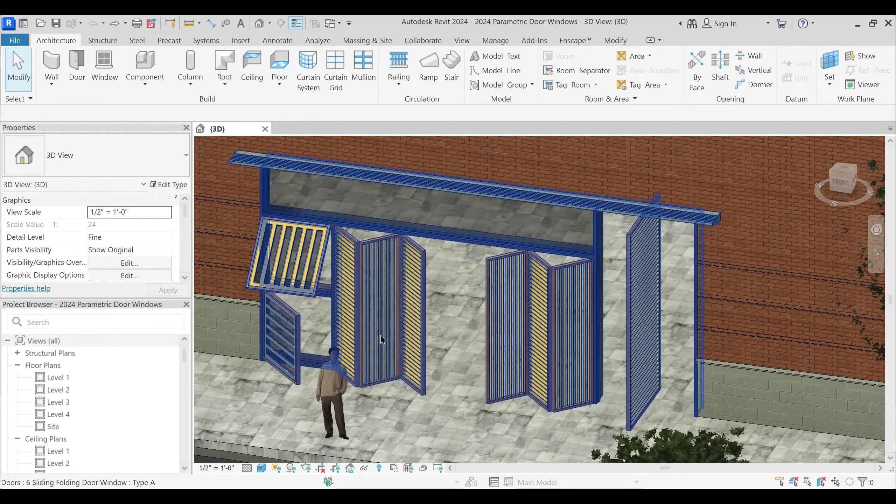So let me just acquaint you to this particular parametric family, wherein if I just select this particular family and if I just change this to type B, this is going to take a bit of time to regenerate.

Just stay tuned. But what you will notice is that with this change in type, the entire configuration of that particular family changes, wherein you see that this sliding folding door shutter, the number of sliding folding door shutters decreases and the size also increases.

This is because if I just go to edit type, then you see that it has all these parameters associated to it. The change in a few numbers of which will give you a different result. So you guys just stay tuned and I will just change a few numbers and parameters and you will see that it gives a different result.

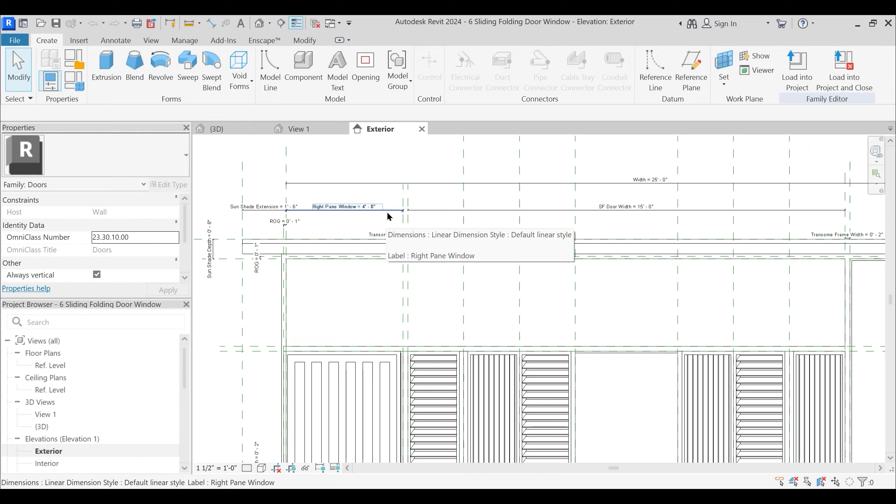If I just go to edit type, then you see that all these parameters has been assigned to this particular family, and all these parameters has this particular parametric computational formulas associated to it. And this is the reason that the change in numbers of this particular family in the project environment respond to that particular change.

Okay, and you see that this is a different family which is reading horizontal louver module center rotation. This is again the vertical louver module align rotation. This is again horizontal louver align rotation. This is the casement window, and this is the awning window.

All these particular parametric families has been designed by me way back in 2016, and ever since till date I'm using this particular parametric formulas, parametric families, doors and windows parametric families, from project to project with few alterations and few changes in dimensions.

And once modeled, I can use it across several different files with the changes. For example, if you see that this is just one single 4 door 2D 3D double adjustable swing with horizontal louvers, has 3 different types, wherein this is type A, which is aligned rotation, this is the center pivot, and this is the off center pivot.

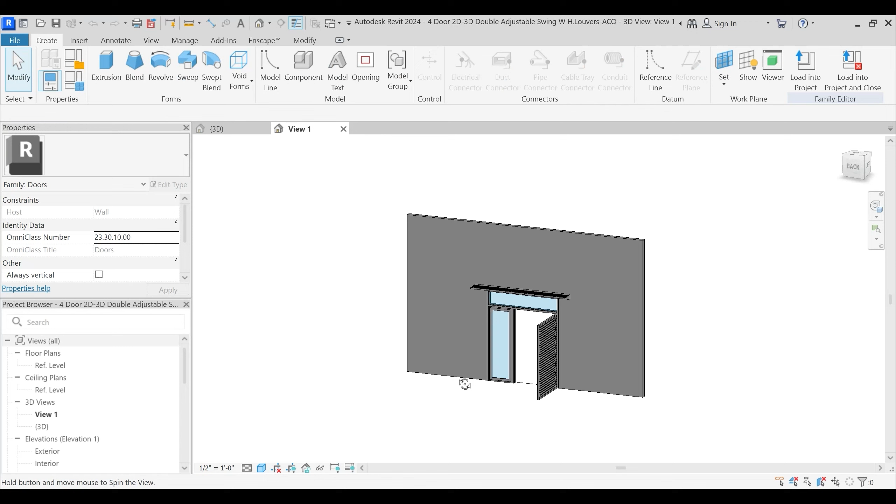But all these doors are one and the same, but it has some or the other customization. And of this one family, that is the center pivot door family, has been used by me in this particular configuration. This is because if I just go to this particular family, if I just go to edit family, then again this is the door template file wherein this particular family has been designed, and several different types has been designed by assigning and constraining it with several parameters, and several different parametric families has been nested and embedded.

Wherein you see that this is that particular center pivot door family, wherein you see that this is the different family. When if you just go to edit type, edit family, then it will take you to that particular family file where that door panel has been designed.

This is again nested with a different family. See, horizontal louver panel line based family. So you see that lot of families, one family within the another family. So this is that line based family, which again has this one nested family, that is horizontal louver single blade.

And you see that only one family, when referenced and nested into another family, you can use from project to project. So all this has been made and which has been used by me from project to project with few alterations and few customization.

So in today's exercise, I'm just going to show you how you can create this particular configuration wherein you can have such sliding folding door panel shutters, and also this window panel shutters, casement and awning. I'm going to show you that particular thing from scratch. So watch the entire video till the end. It is going to be very interesting and very informative session.

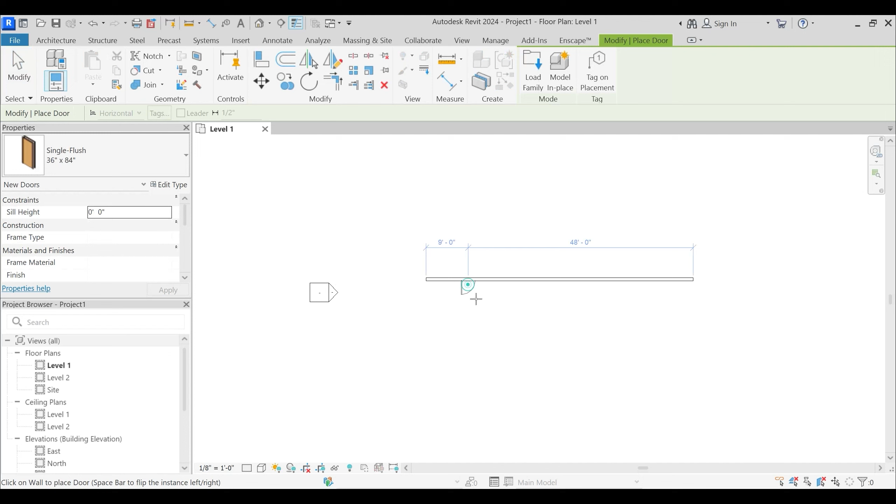So what we are going to do is make that particular customization in a door template file. So essentially, to understand that, first I need to host a door, and you see that this is that particular door which I'm just going to edit. It will open up this particular door template file where we are going to design that configuration.

So if I go to this ground floor, you see that this is the door template file where that particular door has been designed. What I'm going to do is not use this file, but use that door template file where this door has been designed. You see it has this 3D component and 2D annotation lines which are not visible in the project environment in 3D, and this frame elements, but I'm not happy with this particular thing.

So what we are going to do is just open up this template file. File, new, and family, and you essentially need to have your library extracted properly. From here, I will just open up this door template file and open. So this is that template file where we are going to design that particular thing.

And I'm not happy with this frame that comes with Revit, so I'm just going to delete it. Herein, what I'm going to do is go to elevation. It has these inbuilt parameters, width, height and thickness, the three inbuilt project parameters associated to it, wherein I'm just going to stretch this and expand it a bit so we can have a larger configuration. I'm also going to delete these lines which show the indication that there is a door swing here.

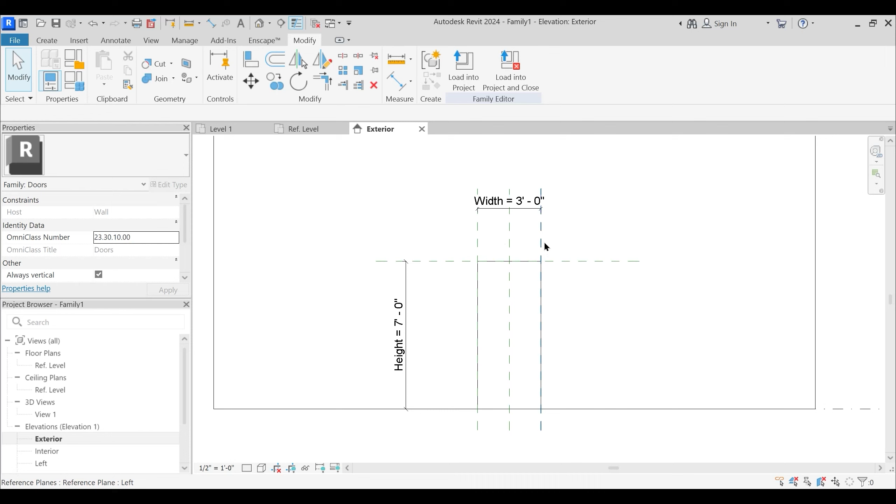So this is the center reference plane, center left, right. Now what I'm going to do is first edit this width and change it to something drastic like 15 feet, and height to something like 18 feet. Fine, 18 feet is too huge, I get that 12 feet is enough. Okay, I just drag this parameter a bit far away.

Now what I'm going to do is edit this window frame, this opening cut. But before that, I'm just going to assign a few reference planes, RP, RP is the shortcut for reference plane. And let me just... yeah, RP and I'm just going to assign that from original reference planes.

From original this, but I cannot see the reference plane. Let me just drag this a bit. What I'm going to do is just make this opening cut 1 inch larger. So just press tab until you reach this point, until you read opening cut, and just edit the sketch.

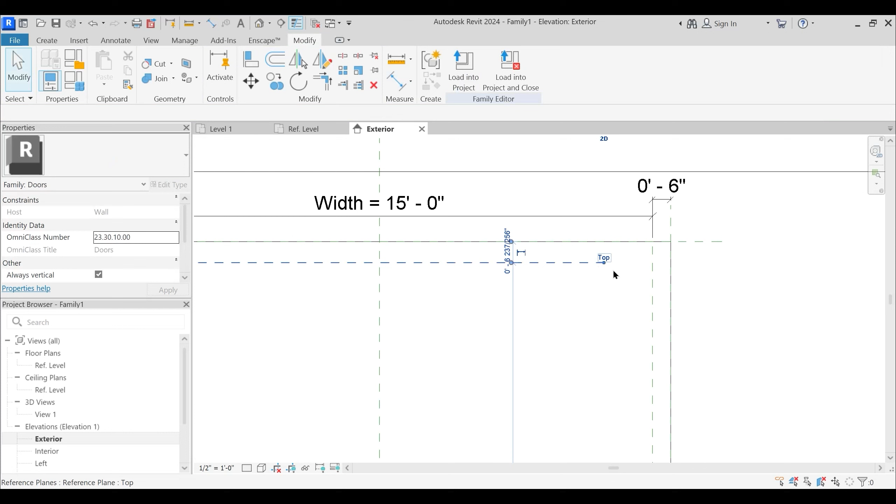So you are editing the original sketch of that opening cut that comes with Revit. So I'm just going to drag it, remove constraint and lock it, remove constraint and lock it again, and remove constraint and lock it again. And with that I'm just going to finish, and herein I'm just going to assign parameters to this newly created reference plane. And from here, no, here it is not needed, only, yeah, this one, align, and yes.

Okay, and I'm just going to select all of this and assign a parameter, and I'm going to use a shared parameters text file for this. I've already created one, but what you need to do is when this dialog box pops up, just browse to a location where you want to save that particular file and say create new. I'll just save this to desktop, I will call it universal parameters. The reason of creating this shared parameter text file is that we are going to use a lot of parameters which will be common for this particular doors and windows family, which you can use again and again.

So edit, and browse, yes, universal text parameters, and from that I'm just going to create new, and I'm just going to call this door windows. Fine, and new, and first is rough opening gap, ROG for short. Fine, that parameter has been loaded, and just going to click OK. From the type properties dialog box, I'm just going to change that rough opening gap to 1 inch.

Okay, and apply. The reason I'll just explain, right now you won't understand, but the reason of doing this thing I'll explain you. So first is what we are going to do to this particular opening cut: for that particular door, what we need is to design a wooden frame, a wooden frame which we can snap to this particular opening cut.

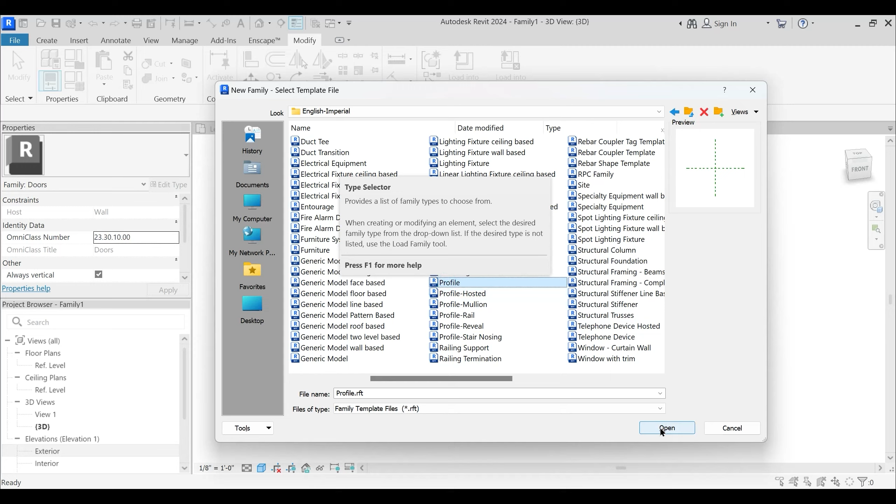Fine, so this is the profile, and first what I'm going to do is use the line command to create something which looks like a typical door window frame. I'll explain the reason for creating that.

So you have one, two, three vertical segments. What I'll do is create reference planes: one, two, three, four, and one, two, three, four, five. So that's five horizontal and four vertical segments.

Now I'm going to create this particular profile across these reference planes, using the line command: one, two, three, four, five, six. With this created, I don't need this reference anymore, so I'll delete it.

Now I'm going to use the line command and lock all these particular lines to the reference planes. And lock this last one, and this also lock.

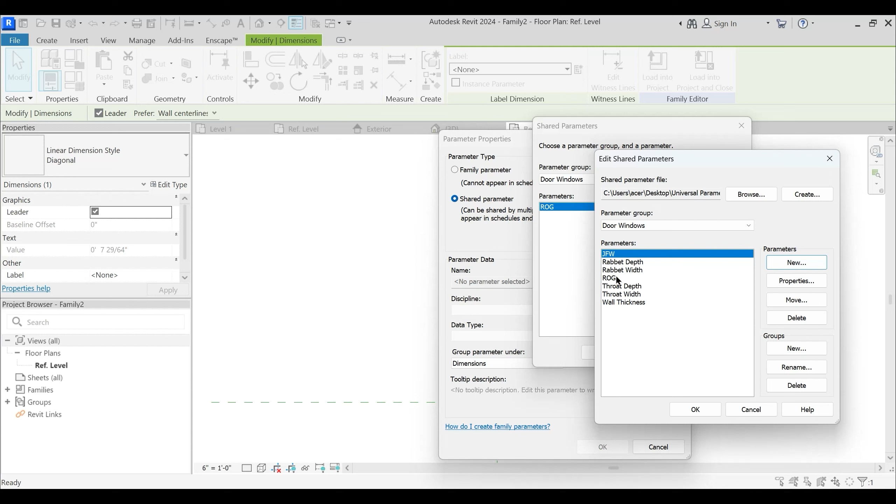And we have jamb frame width, JFW for short. What else? Throat width, throat depth, wall thickness, and most importantly, a thickness parameter - let's say door panel thickness. Door or window, so let's keep it generic - just thickness parameter.

Fine, I'm going to load all these parameters. First I'm going to select what I selected earlier. Just click OK - oh, this should equal wall thickness. And both of these should equal throat depth.

And this should be throat width. This is the jamb frame width. And this is the rabbet width. And this is the rabbet depth. And this is going to be just the thickness.

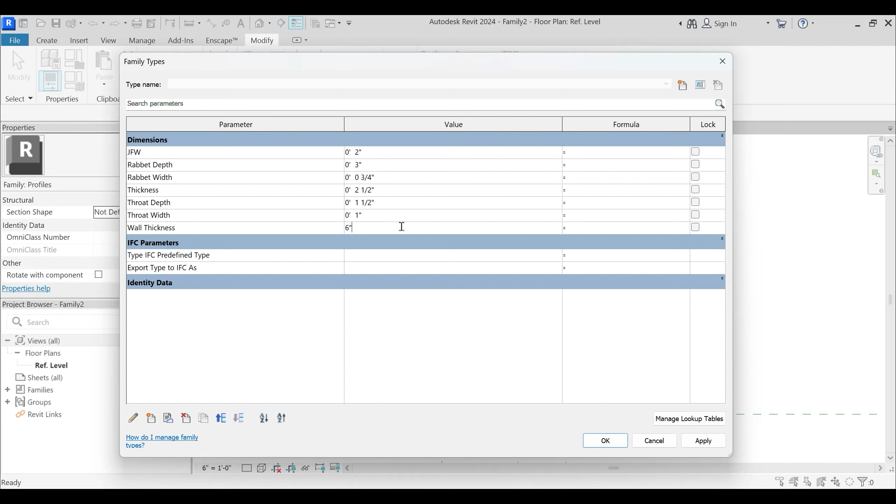And with all these changes, if I just click apply, you see that this particular thing changes. Uh-oh. Oh, why is this creating a problem? Yeah, fine, okay.

I guess there's some problem here - jamb frame width is 2 inches and throat width is... okay, throat depth is the problem. So throat depth should only be 0.5 inches and not 1.5. How did I... yes, fine. So now this perfectly looks like a typical door frame.

Now I'm going to load this profile into the door template file. So this profile from family 2 should go to family 1. Since it's a profile, you cannot model it, you can only host it. So I'll go to family profiles, and I have family 2 - I'll rename it to be specific, calling it wooden frame.

Copy and rename this and paste it. Now what I'm going to do is close family 1 - not family 1, this family 2 - since I've loaded it into that particular door template file, I don't need it anymore.

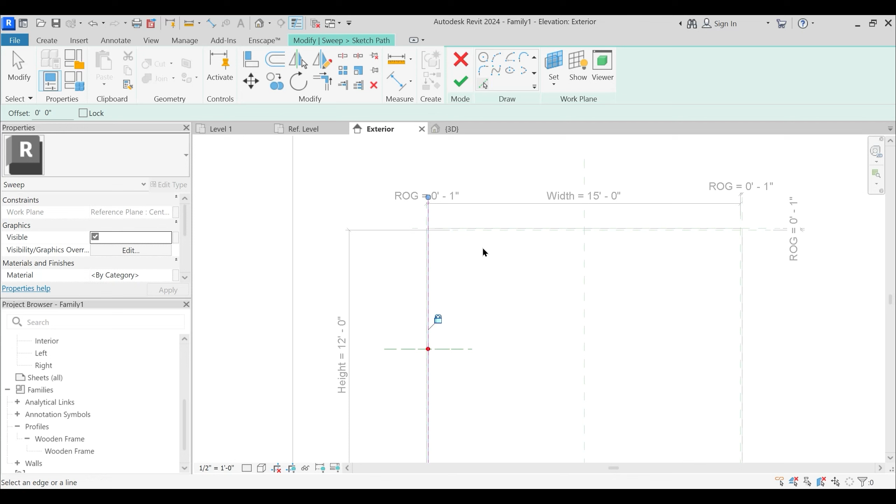I'm going to snap to the original reference plane of the original door cut. I'm just going to lock it to this, and align and snap.

Let me just join this to this. Align and just snap this point and lock. Align and snap this point and lock.

With that, I'm going to finish, select profile, load that wooden profile, and finish. So that wooden frame is now hosted to that particular opening cut, but it will not be properly hosted.

Since it is a profile, it has this instance parameter which you can edit, wherein I'm going to change this angle to 180, and this horizontal offset and vertical offset.

So let's check what horizontal offset corresponds to. 2 inch. Yeah, fine, this is that particular fine. So this is the reason in that particular template file of giving this particular face the dimension jamb frame width.

Jam frame width refers to the door condition, the frame condition in jamb, the position of this door frame in jamb condition. That's why we call it jamb frame width, and I have given it 2 inch because I know that in this project environment I'm going to make this particular opening cut 1 inch larger.

So with this 2 inch, I would exactly flush it and create that particular frame just like it is hugging a wall.

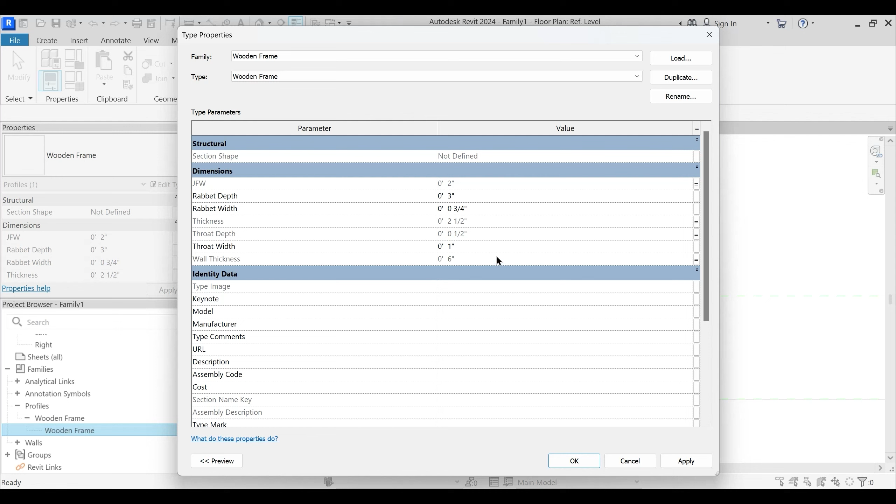So this is how we pass on the parameters of this newly created embedded file to this template file, or the host file, to the family which you embed into another family. You have to pass on the parameters, and you see now that it has all those parameters, jamb frame width and throat depth and everything.

So with this I'm going to select this particular profile and go to this jamb frame horizontal offset, and make it equal to jamb frame width.

Whatever is the condition in the project environment, if you constrain it—if I had just given it a variable here and not constrained it with a parameter, you'd never know what the wall thickness or condition will be in the project environment. So in order to constrain it with a parameter, whatever the situation in the project environment, it will always stay in place.

Now what we need to do is its vertical alignment. If you measure this, it's 3.5, but you never know what the wall thickness will be. Right now it is 6 inches, so in that case this offset is 3.5.

But what if the thickness of the wall is 8 inches or 9 inches in the project environment, and you want this particular frame to expand accordingly? In order to make this happen, I'm going to use some computation, wherein I'm going to assign this a parameter and call it equal to wall thickness—yes, wall thickness, the parameter which has been passed on from that profile family also.

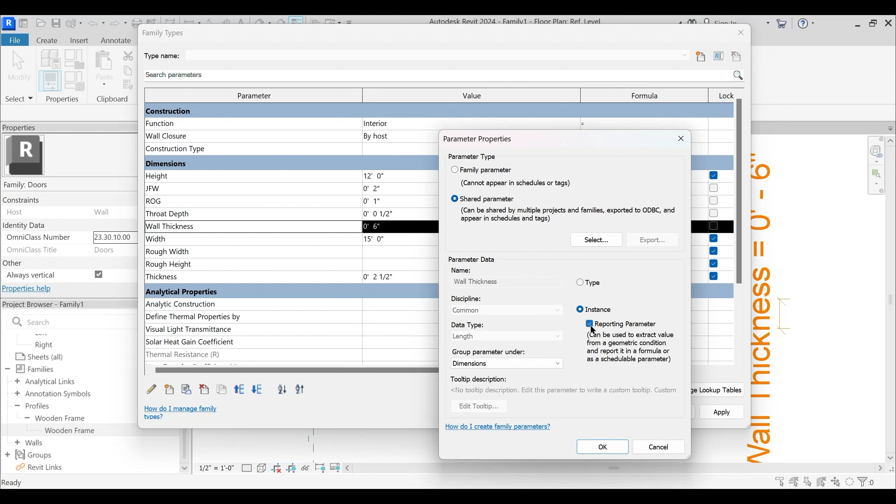Okay, what I'm going to do is make this wall thickness edit an instance and reporting parameter, because I want to report it to whatever are the variables in the project environment. So with that, it is now a reporting parameter.

Now for the vertical offset, I'm going to define one more parameter called frame vertical offset. I want to make it an instance parameter because it's going to be used on another instance, driven by the reporting parameter wall thickness as a formula. I want this parameter to be driven by another instance parameter, which is why frame vertical offset needs to be instance.

Also, I'm going to use this throat depth. This is the throat depth — if you remember from the profiles section we designed. Let me go to this wooden profile and edit it, and you see this is the throat depth. This has a relation with the wall thickness, so that also needs to be instance.

So frame vertical offset should be instance, and throat depth should also be instance. What I'm going to do is define what the frame vertical offset should be: it should equal whatever the wall thickness is in the project environment.

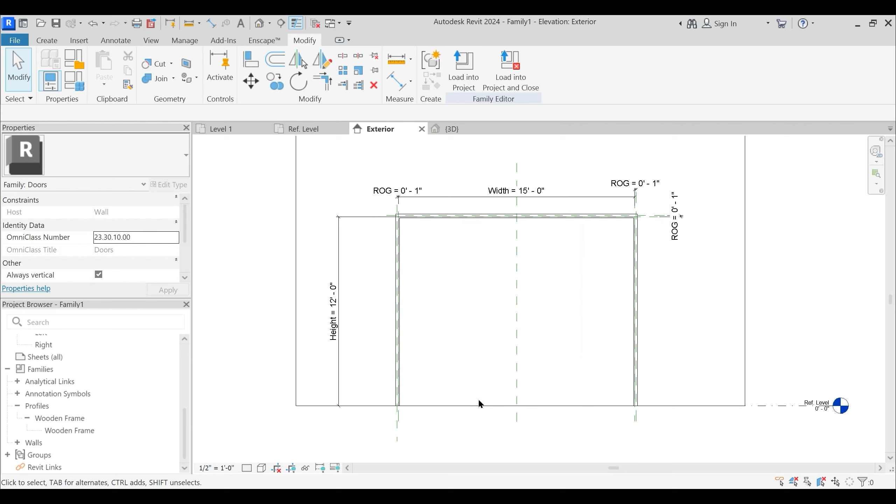Now we need to create the configuration, wherein this family is going to have a lot of other embedded and nested families within. So I'm just going to draw a couple of reference planes.

One to two, one and two, one and two, and also one over here. One. All of that, I'm just going to strike a parameter, and yes, one more over here too. Okay, what I'm going to do is select all of these parameters and make them equal to...

...a new parameter called transom frame width. Okay, and with that I'll have that changed.

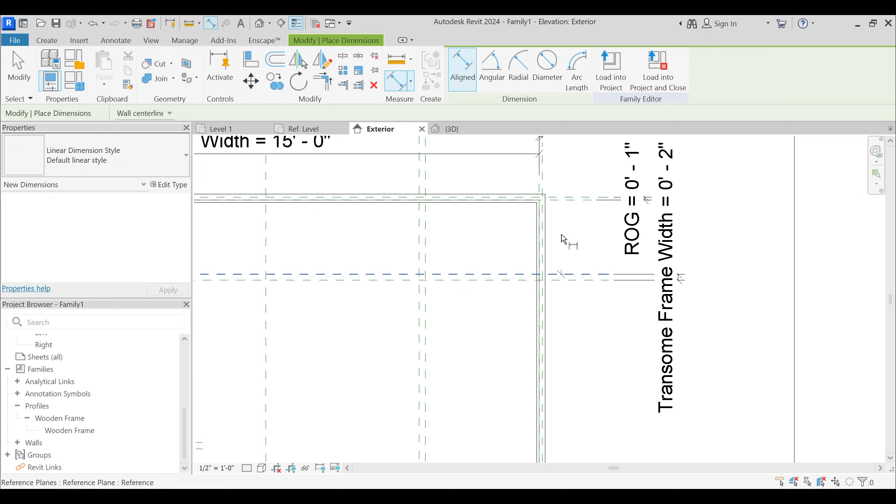What I'll do is change the transom frame width to 2 inches. Now I'm going to define one more parameter over here. There are going to be a lot of parameters, so...

3 inch — yeah, 3 inch, this is better. And this should equal a new parameter, transom height. Finish.

The file already contains transom height — yes, I selected the wrong parameter. I will just make this transom height 18 inches for now. You cannot change it from here, you have to change it from here. Where is transom height? Yes, change it to 19 inches.

Apply, yeah, fine — just see that it parametrically expands. Now we have to snap that wooden door frame profile to this configuration to achieve this result. You see there's a frame across this entire configuration, horizontal and vertical wooden frame. Let me quickly do that.

With that work plane selected, set work plane — center front back. What I'm going to do is create a sweep, sketch path, and for a couple of minutes I'm just going to follow the same process to create this particular profile. Just stay tuned. Align and lock, align and lock, and sketch path finish, select profile and wooden frame, and finish.

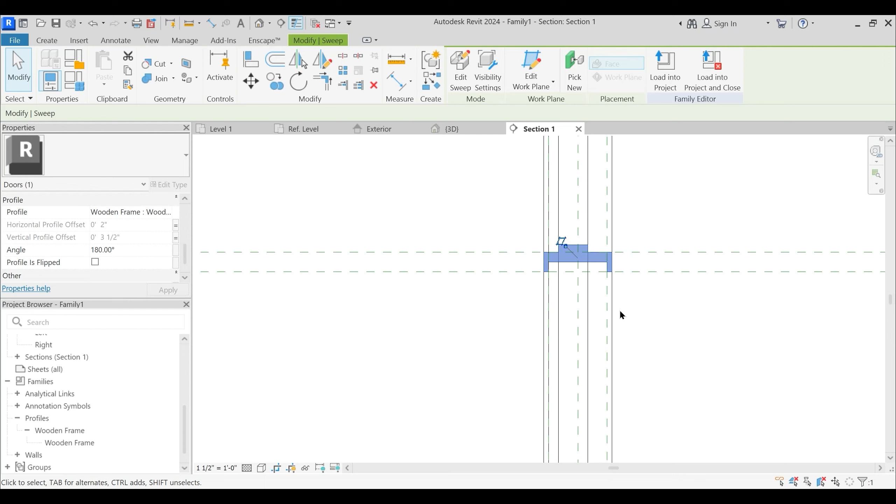So now for guessing games, what we need to do is set this to 180. Horizontal profile equals jamb frame width, and vertical profile equals frame vertical offset. Once designed, you can use those parameters again and again, and now this is perfectly corresponding to that vertical segment.

Only thing I forgot for this is the material part. Material, shared, select, edit, new, and wooden frame material. That is the material parameter, so wooden frame material, and data type should be material.

I hope the recording is on. Yeah, fine. So okay, and likewise just change this material also to this wooden frame material.

Now let's go to exterior and just hide this. Now I'll be pretty much quick and fast, so just stay tuned. Sketch path, pick lines, lock, align, dot and lock, dot and lock, and finish. Select profile, wooden profile, and finish.

Section and guessing games again. Frame wooden material and 180, and profile is flipped, and vertical frame vertical offset, and horizontal should be equal to jamb frame width.

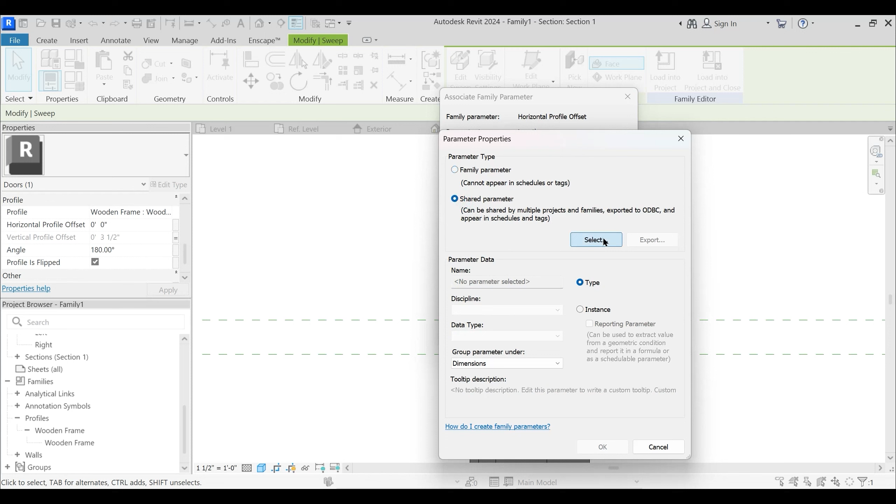Okay, now in order to make this in place, we have to create one more parameter, and that would be shared parameters. Select, edit, new, and negative jamb frame width. Just use that negative jamb frame width. Go to family types, and for negative jamb frame width just type formula minus jamb frame width. That will become -2, and yeah, that is now perfectly flushed.

See, what you need to just do is join this to this, join this to this. Let me just create other parts and pieces of this.

I guess that this should have stopped here. So edit sweep and sketch path. Remove constraint and lock it. Yes, finish. And likewise for this also.

Unjoin. Yes. And go to that exterior. Why is it not visible? Yeah, it was hidden. Edit sweep and sketch path.

Certain things you won't understand right now, but once that thing is achieved and the modeling part is done, then you will understand, and finish.

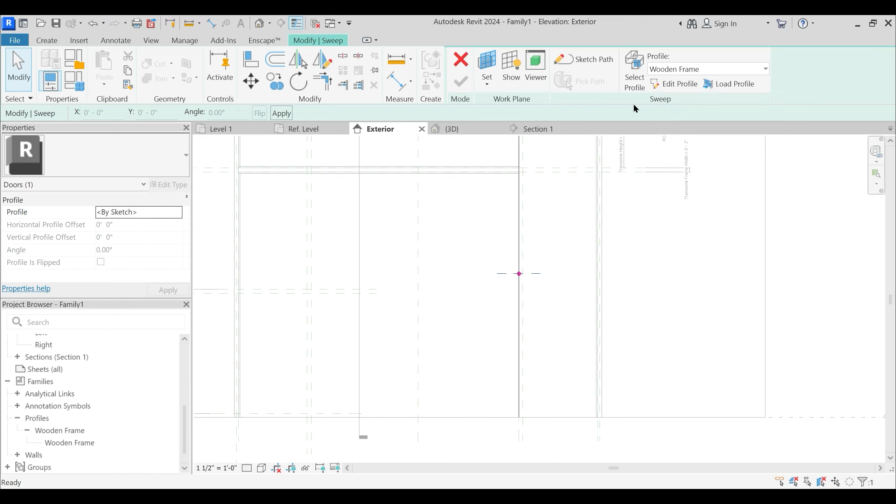Let me just create another sketch path, pick lines, and this side, align and lock, and lock, and wooden frame, and just finish.

Now let's see it in plan, and yeah. So now we need to properly assign this in place. Vertical frame vertical offset. Yes, this is done. So this corresponds to the configuration of that building profile.

Fine, so this again, I click the wrong button. Okay, wooden frame material and guessing games 180. Profile is flipped, frame vertical offset, and yeah, it's done. And join 1 to 3D, and yeah.

Okay, so now you have this. The reason for stopping here was that we were going to have this frame here. So join this and join this. Join this to this. Yeah, everything is joined.

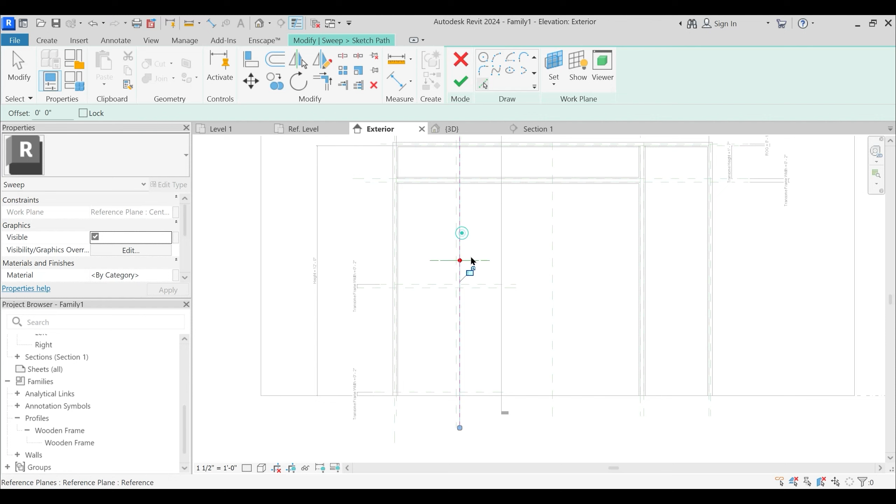Fine, let me go to exterior, and now let me just quickly design this part. So create sweeps, sketch path, pick path, and align, dot and lock, and finish. Select profile, wooden profile, finish.

Create one more sweep, sketch path, pick lines, inside, lock, align, bottom reference plane, dot and lock, this, dot and lock, modify and finish, select profile and wooden profile and finish.

Okay, now let's go to plan again and properly position that in place, which is right now not positioned properly. So let me just select this and drag it and pin, and drag it a bit and then pin it again.

Yes, select this, and again material to be equals the wooden frame material, and guessing games 180. Frame vertical offsets, and once created you can use it again and again. This material to be wooden frame material, and 180, but the profile is flipped, I guess. Yes, and I'm right. And vertical frame offset is going to frame vertical offset.

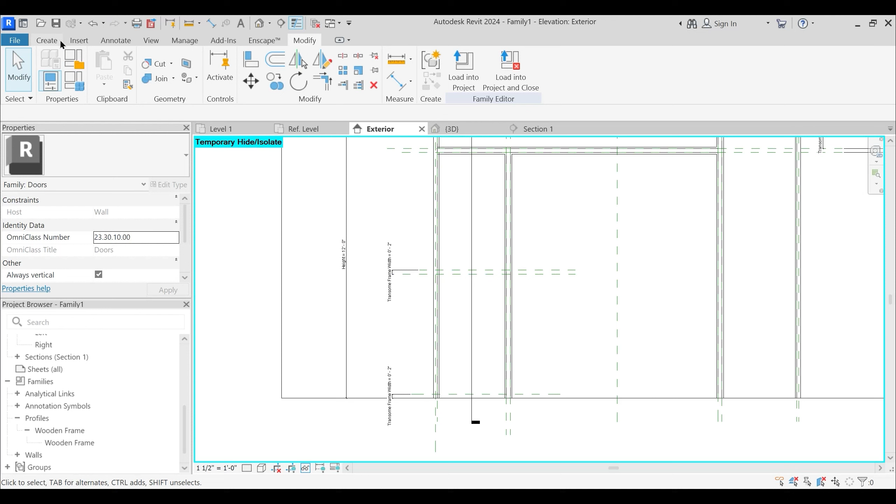Okay, and create and quickly sweep, sketch path, and pick lines, lock, align, lock, and constraining reference planes to reference lines, wooden frame and finish, and let me do both of this also.

Then once and for all, we will position all of them together in one place. Pick lines, lock, align, dot and lock, finish, wooden profile and finish.

Create, sweep, sketch path, lock, align, and finish, wooden profile and finish.

Yes, and now go to that particular section where you have to position all this perfectly in place, and for that I will be pretty much fast. 180 and vertical frame offset, and horizontal is to be jamb frame width. Yes, so that's now perfect.

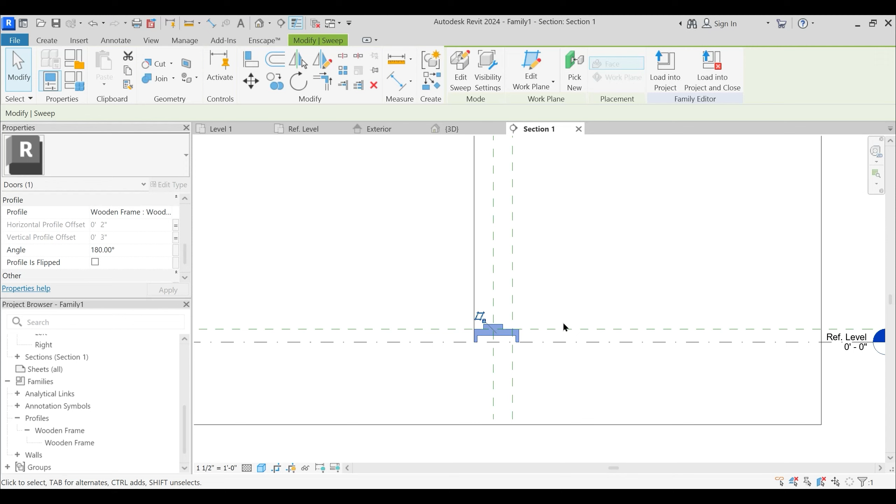And with this, now this also wooden frame and 180, vertical frame offset will go to frame vertical offset, and yeah, that is positioned properly.

This to be wooden frame material and 180, and profile is flipped, and frame vertical offset. Fine, and join all of that 1 to 2.

Okay, and then let's go to 3D. And you have beautifully created that particular entire configuration. Okay, what you just need to do is just cross check whether something is left to join. Yes, now everything is joined.

So let me just, from here to here, call it a parameter and share parameter, select, edit. And now I'm just going to create a couple of parameters which we are going to use during the modeling process. So just stay tuned.

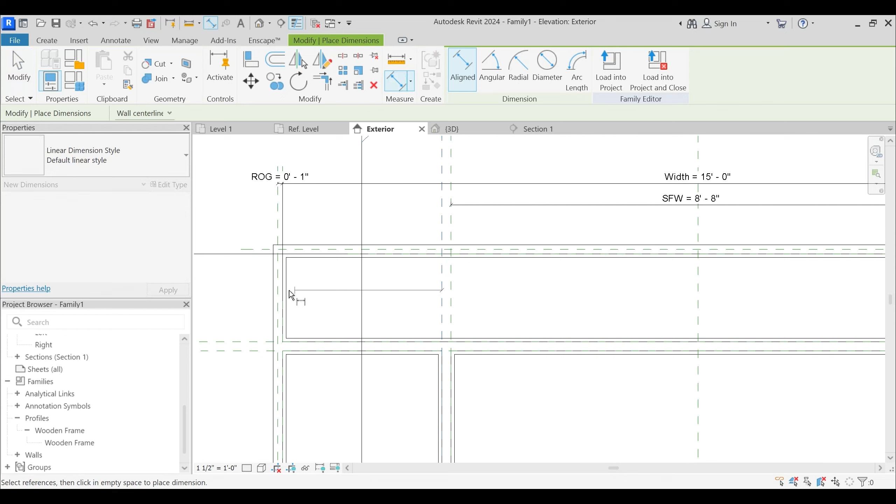So this is going to be sliding folding width, 8 foot 8 inches, and this is going to be right pane window, right pane dash window width.

Okay, right pane, not panel, so just delete it. New, and right pane window width, because we are going to reference awning and casement window, so that's why.

New left pane door, let's call it pivot door, okay, pivot door width. Fine. So okay, and what we are going to select this for the right pane, right pane window width.

Okay, fine. So now all this, what you see, has been assigned the parameters and constrained. But for this last one, we cannot assign a parameter, otherwise it will pop up an error that you're over constraining a sketch. So you have to use a parametric computation formula to assign this.

Even if you just go and try to assign this a parameter, and let's just call it any random parameter, then you see that it will say reference planes are over constrained. So what we have to do is use this particular width in order to assign the geometries that we design. In order to assign parameters to this part, we have to use the computational formulas.

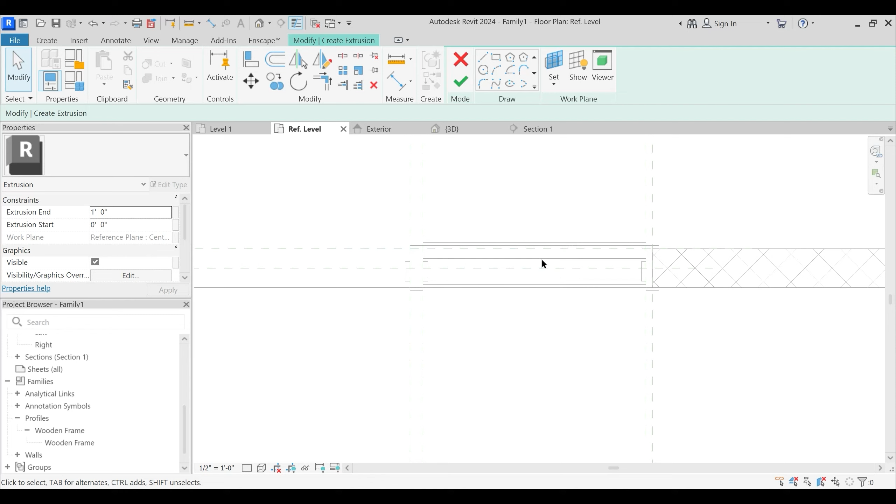Okay, fine. So for that, I'm just going to create one extrusion and set plane, and while going to reference level, we are going to host a glass onto this surface. Which surface are we going to use? Yeah, this surface.

So I'm going to set and pick a plane and use this particular surface, and then go to exterior, and herein I'm just going to design one simple extrusion which I'm going to lock. Okay, lock all of this. And I'm just going to call this extrusion, and it is equal to...

Shared parameters, and that would be one more parameter, that would be glass thickness. Okay, and glass thickness, okay. Yes, okay. And this is going to equal glass material, which is the inbuilt material of Revit, so you don't need to design that material, you can just reference it.

And this extrusion end should equal glass thickness, which, while going to this type properties dialog box, I will select that glass thickness and change it to half inch, that is 12 mm, standard conventional door glass thickness, and just finish. Let's go to 3D, and yeah, see, your glass has been modeled perfectly in place, but I guess...

I guess that it has been snapped.

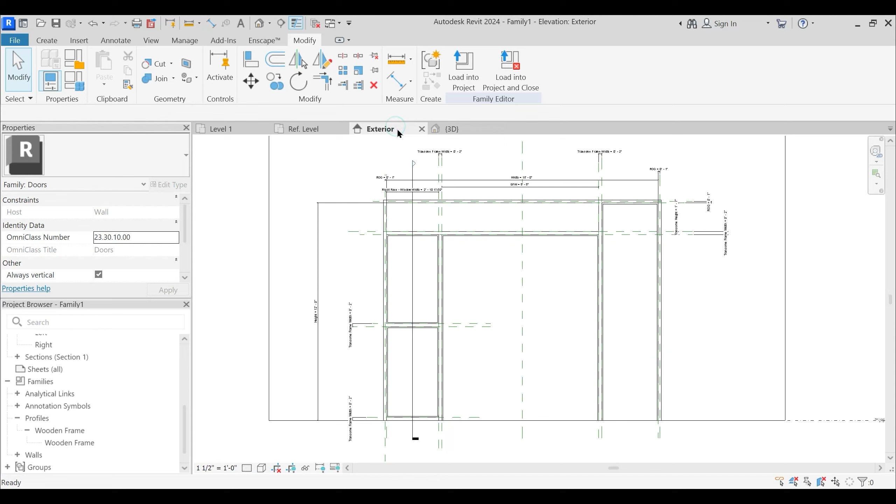Okay, now what we have to do is that the toughest part of this is designing a sliding folding door. For that, just like we created that profile, we now need to create one generic model which we will use multiple times, even for these windows and even for this particular pivot door.

So what I'm going to do is go to file, new, family, and this time I'm just going to use a simple English Imperial family template, English Imperial simple generic model. This template file I'm going to use, wherein I'm just going to design one door shutter.

I'll go to this particular family category and tell Revit that whatever we are designing is a door. As soon as you do that, you need to go to manage and object styles and change all these colors to black, otherwise it will reference those colors while modeling, which I generally prefer to be black.

And okay, and the last one. Okay, fine, apply and okay. Now what I'm going to do is create one door panel family.

So I'm just going to create, and with that set work plane, and with work plane to be reference level, I'm going to create RL. The shortcut is RL, create this reference line. Snap it to the intersection of these two reference planes and draw it in the space.

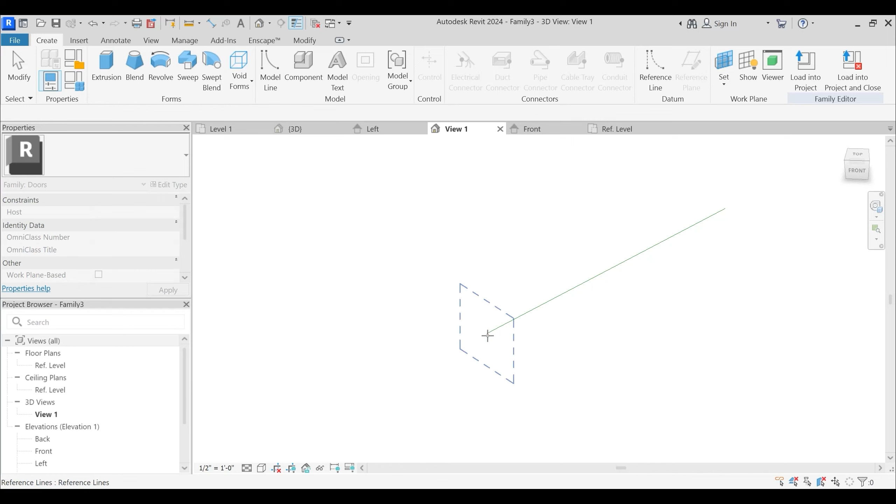For example, if I go to create, set, and pick a plane, you see that 1, I press tab, then 2, I come here, then 3 - these are the integrated work planes associated to this particular reference line, and those lines are very powerful lines onto which you can snap a 3D geometry.

Okay, so one more time: create and reference line, snap to the intersection, draw this, modify, lock, and lock. Now I'm just going to draw one reference plane here, and I'm going to measure it, and make it equal to width.

Since we have told Revit that whatever we are designing is a door, it has automatically preloaded these particular 5 parameters associated to the door. So from this we can change this to width. If this was just a generic model file, then those parameters wouldn't have appeared. Okay, now make this equal to width.

Now I will also change this particular one. When you select this line, you see that temporary dimension that pops up. I'll select this particular thing and change it into a permanent dimension, which again I will change to width. Okay, now I'm just going to assign a rotation parameter to this.

Wherein I'm just going to select this and call this shared parameter, edit, and that would be equal to 3D door panel swing. Because it is a 3D element, that's why 3D door panel. Okay, 3D door panel swing.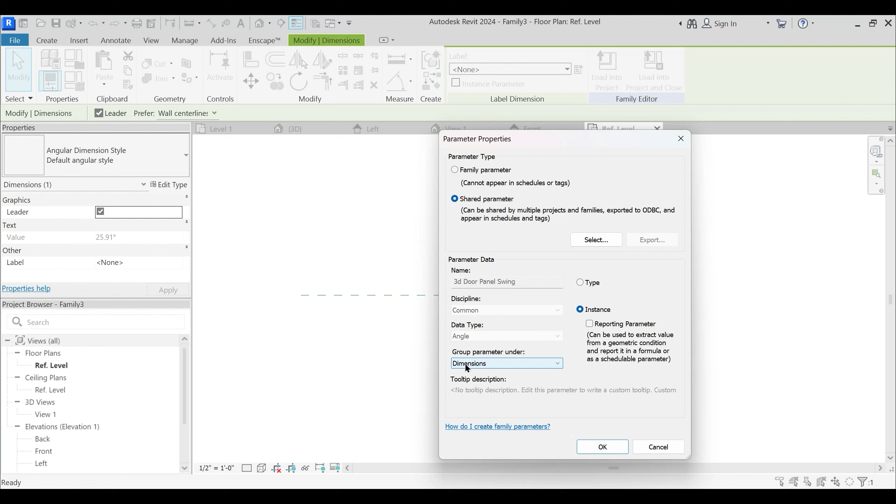And I'm going to make it an instance since I want to change it instantly when I load it into the project environment. And I would generally like to group it under constraints. There is no logic, you can group it under any category, but angle parameters I generally like to group under constraint.

Okay, and with that, you see that you have created an angle parameter, and if I just test it out, you see that this reference line rotates with this angle parameter. Also, if I change this width to 5 feet, you see that this reference line expands. Testing out parameters at each stage is very important.

Now I'm just going to make this 0, and I'm going to design a door panel, but I'm going to design it in the elevation. So I'm going to say create an extrusion, and set plane and pick a plane, and I'm just going to select the integrated work plane. I just showed you that the reference line has that integrated horizontal vertical reference planes to it.

From that, I'm going to select this vertical one, and go to front elevation. I would first design a reference plane over here and hide this reference level, and assign this a parameter align, and this should equal height.

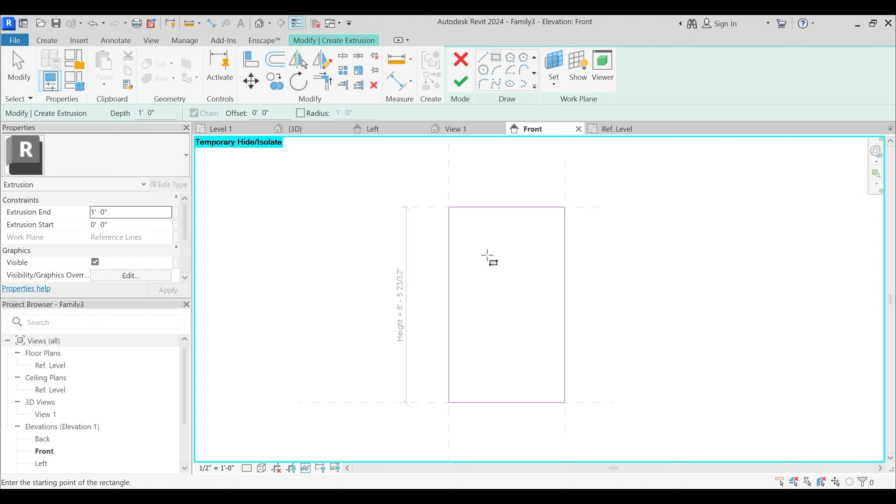Now we need to create the inscribe frame first - the inscribe frame which will be hosted to the wooden frame, and the inscribe frame which will be having the actual door panel. That inscribe frame would have the thickness of, let's say, offset negative 1.5.

And rectangle, and I'll just draw that particular rectangle minus 1.5 inch, and draw that. Now before finishing off, I will constrain it with the parameters.

If we want to change this in the project environment, then we can change it - 1, 2, 3, 4. I'll just call it share, select, edit, new, and that would be inscribed frame thickness. Just finish it, and from here I will change this to inscribed frame thickness.

So the thickness should equal extrusion start 0, and extrusion end should be equal to thickness. And it should be equal to a typical door thickness - typical door panel thickness, that is 2.5 inches. Apply, okay, and finish.

Now let's go to 3D. Not 3D of this, but this. So now you see that this particular inscribe frame has been created.

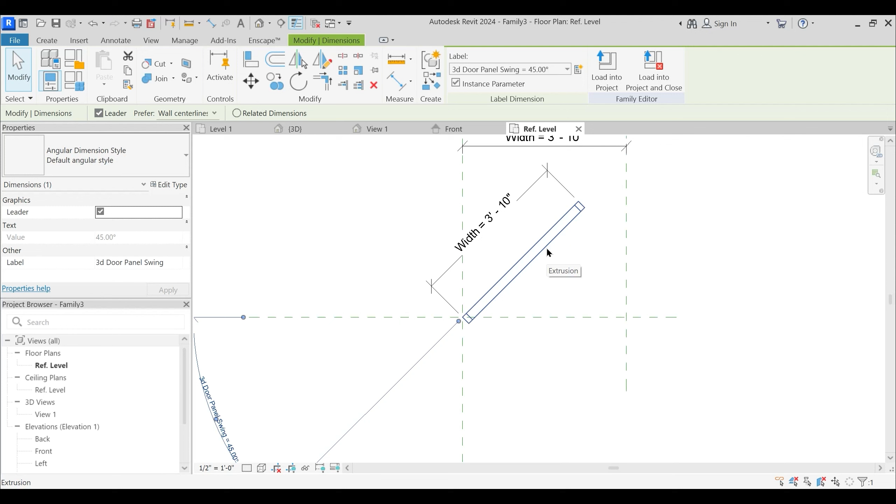If I go to testing of parameter, you see that the entire 3D geometry rotates because we have snapped it - we created it with reference to that reference line, with the work plane of this reference line. When you select this particular thing, it reads that the work plane is the reference line. And since that reference line rotates, the entire 3D geometry also rotates.

And I just change to 5 feet. You see that the 3D geometry also expands.

Now we need to create the other parts and pieces of this. So for that, what I'm going to do is create, set plane, pick a plane, and again create that shape. Watch this point - again press tab until it reads that reference lines, and again go to front.

This time we are going to design the door panel, which will be having a stile and rail door panel within it, which will be having a piece of glass. So I'm going to do extrusion and rectangle, 1, 2, 3, 4. This time for the rectangle, I'm going to use an offset of -3 inches, and create this.

Just like we created the parameters for that inscribe frame, I'm going to create a couple of parameters for this door panel - the stile and rail door, wherein this is going to be frame. The only reason for creating this as a parameter, I'll show you once loaded in the project environment.

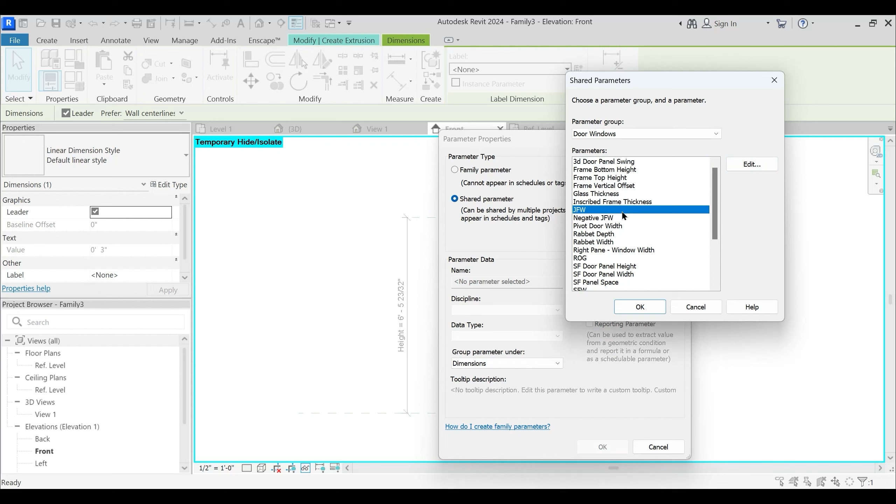And from that I'm going to use the frame bottom height - I would have loaded that frame top height and stile width also. So now we can use that frame bottom height, yes, this to be frame shared parameters, and frame top height.

The vertical elements of the door are called the stile, and the horizontal elements are called rail. So you can also name this rail top height and rail bottom height, but I have named it frame bottom - that's okay. And select this and share parameters and call it stile width.

Now the computation I'm going to use this time is going to be slightly different, wherein you see that right now the reference plane which we have used is this, and we are hosting that geometry with respect to that reference plane. But I want this particular thing, irrespective of this inscribed frame thickness, I want this to remain always.

I want this particular door panel to always remain in center. So what computation would I use for this? I'm going to create a couple of shared parameters - calling one 'frame offset exterior', 'frame offset interior', and one more, 'door panel thickness'.

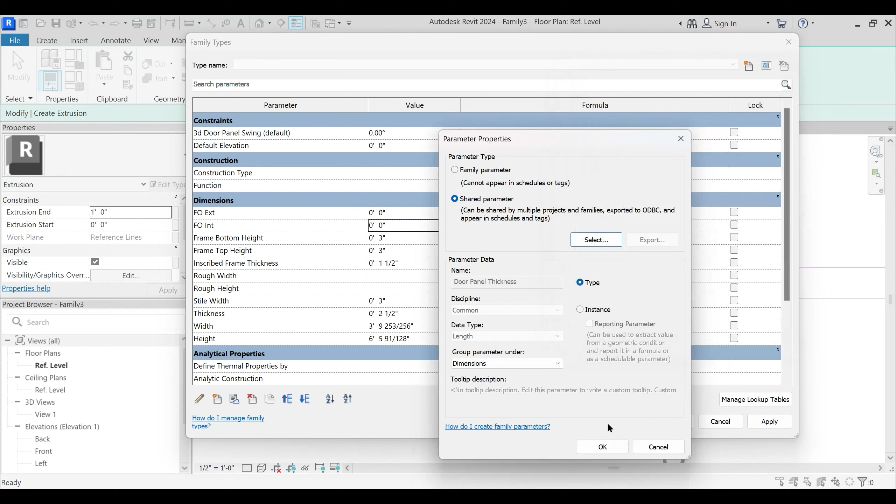I'm going to load all of these and select them one by one: frame offset exterior, frame offset interior, and the door panel thickness. Now for the computation - I'll use this door panel thickness as a parameter for computing the 3D geometry, without assigning it directly to any element. I'll set door panel thickness equal to 1.5 inch.

Now what would be the frame offset exterior? It would be the overall thickness of this inscribed frame divided by 2, minus door panel thickness. You need to be very specific while typing - Revit is case sensitive. So: thickness minus door panel thickness, in parentheses, divided by 2. That changes the frame offset exterior to half inches.

And what would be the frame offset interior? This should actually not be frame but door panel exterior - sorry. Let me edit and delete both of these, since frame offset exterior can't be edited directly. I'll define two more parameters: door panel exterior and door panel interior, load both, and set this equal to door panel exterior.

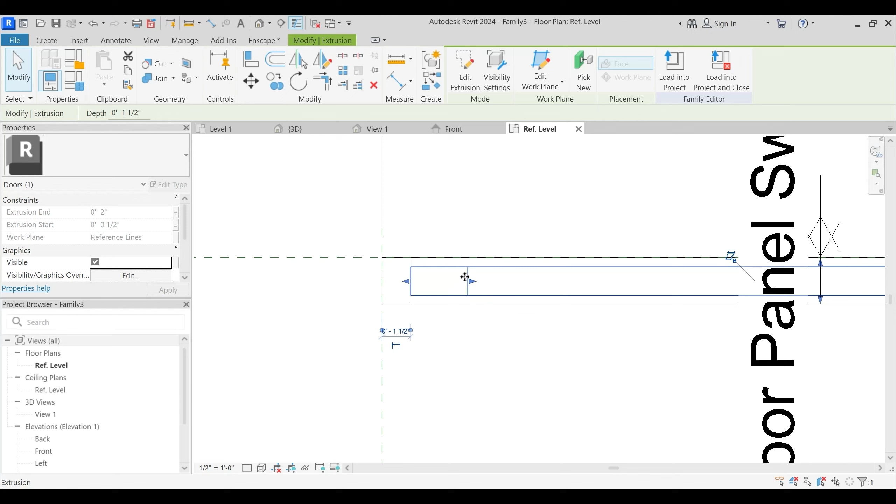So whatever the overall thickness is in this project environment, this will exactly stay in center. If I apply this, and change the extrusion start to door panel exterior and extrusion end to door panel interior, then finish - you can see that this door panel is exactly in the center of this inscribed frame.

This should be material, set as shared parameter - inscribed frame material. We don't have that yet, so edit, new, inscribed frame material, and change it to material type. One more: door panel material, also changed to material type.

Load both inscribed frame material and door panel material. Select inscribed frame material first, and set that as instance, so I can change it instantly for every instance of that door placed. Now this is new and shared, and we've already created door panel material. So now this file has these two parameters - door panel material and inscribed frame material - of which door panel material needs to be instance, along with the 3D door panel swing angle.

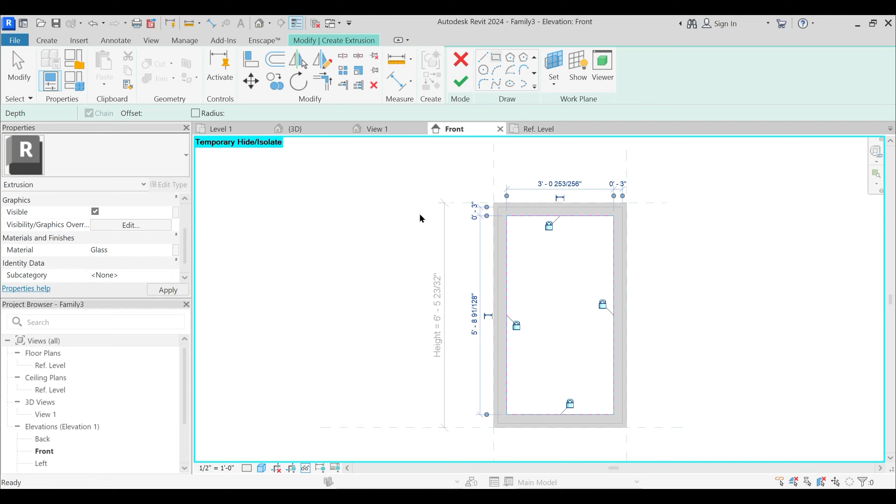This will equal the material of glass, the pre-existing material in Revit, but we need extrusion start and extrusion end. So I'll load two more shared parameters: glass offset exterior and glass offset interior. The glass thickness is already there, so we don't need to design it. I'll select glass offset exterior, glass offset interior, and the glass thickness.

Yes, glass thickness. Again, I'm just going to use that same computation wherein I apply this glass thickness of 0.5 inches. What would be this glass offset exterior? That would be the door panel exterior, whatever it is, plus the glass thickness. And what would be the glass offset interior? That would be glass offset exterior plus the glass thickness.

This is a bit confusing, but it is just a computational formula, nothing else. So 1 and 1.5. Okay, fine, apply and okay. And with that, if I just finish it, what you notice is that this has placed in center, but its width didn't increase.

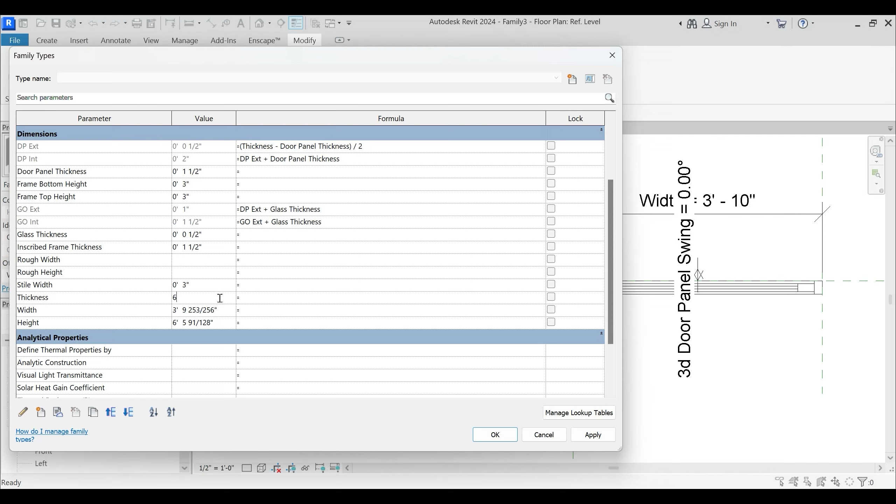To show you, I just change this particular thickness to something drastic like 6 inches. And with that, if I just apply, then what you notice, because of this computational formula that we have used, is that this door panel and this piece of glass always stays in center.

While coming to that, I'll just increase this width to 45 and everything expands perfectly, no issues. And again, I'll change this to 45 and width to 3 foot, and we are going to have a 3070 door. And this thickness back to 2.5.

Okay, and this angle to 0. Just what we need to check is the height parameter. Yes, height also expands. So I'm just going to call it a 3070 door. Now what I'm going to do is that I'm just going to use this particular one family several different times. The hardest part is done.

Now what we need to do is that I have to use this in this particular door template file several different times, but with some or the other customization. So first, what I will do is load this family into the door template file, and you see that you can place it, but I will just press escape and delete this particular file because it's loaded in this template file and don't need it anymore.

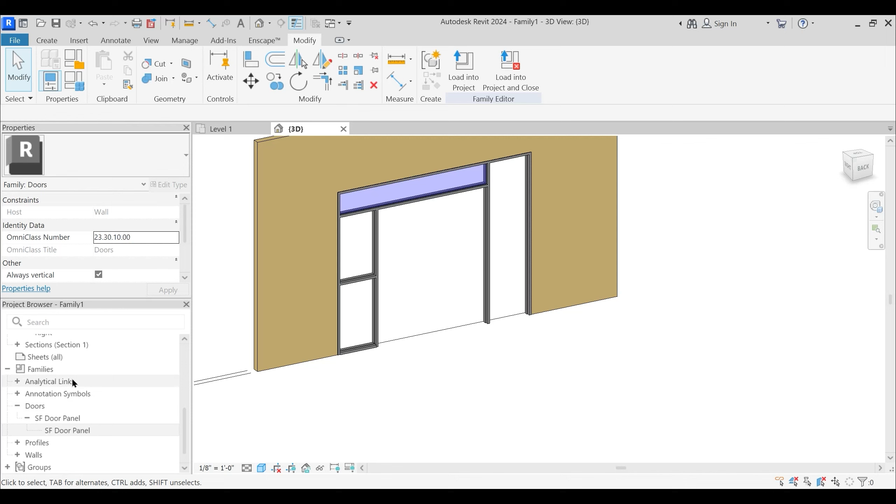But if I just drop down this arrow, then you have this family 3, of which I will just rename, and I will call this sliding folding door panel, and just copy it and rename and save it.

Okay, now before hosting this to this particular configuration, I would just like to create a few parameters for that particular sliding folding door panel. I would just like to create a few reference planes and do some computation. Fine, so just try to follow.

So what I will do is that I want 3 shutters on this side and 3 shutters on this side. So I will just create a couple of reference planes, 1, 2 and 3, and 1, 2 and 3 over here.

I am just going to measure it 1 to 2 to 3 and 4. No, 1 to 2, 3, and just let me scale down this. Yes, and also I'm just going to create 1 to 2 to 3. Yeah, fine, I should have created it once at a go. So delete and 1 to 2, 3 and 4.

Now what I'm going to do is that I'm just going to load that sliding folding parameters which I had already created, but I need to load them in order to assign them here. So I'm just going to add a new parameter, shared parameter, and from that I'm just going to use this sliding folding door width, which is already created. Sliding folding width has been assigned.

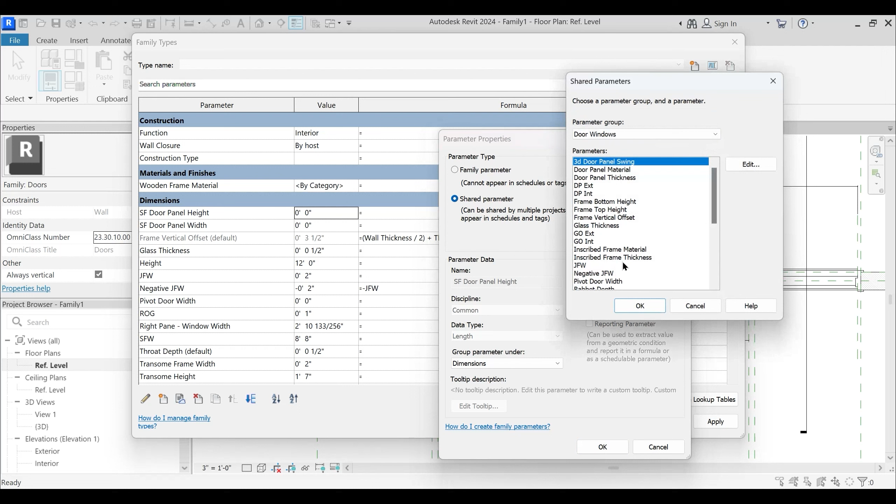Now I need to create 1, 2 and 3. So first is door panel width - sliding folding door panel width - and I'll just take this all the way up: sliding folding door panel width and door panel height, sliding folding door panel height. Okay, one more: sliding folding door panel space. And okay. Where did it create? Yeah.

Sliding folding door width and sliding folding door height. Where has it been loaded? Not been loaded. Sliding folding door height, and yes, okay, fine.

I'll just apply this. Now what I'm going to do is create two integer parameters. These would be family parameters - I don't need to create a shared parameter since I'm going to use this only for this file. Left panel, and that would be integer, grouped under constraints, not construction, constraints. And one more, that would be right panel, integer, grouped under constraints.

Now I'm going to say that right panel should be 3 and left panel should be 3. So what would be this sliding folding door panel width? That would be the overall sliding folding width divided by, open parentheses, left panel plus right panel, close. So that would make its width equal 1.5.

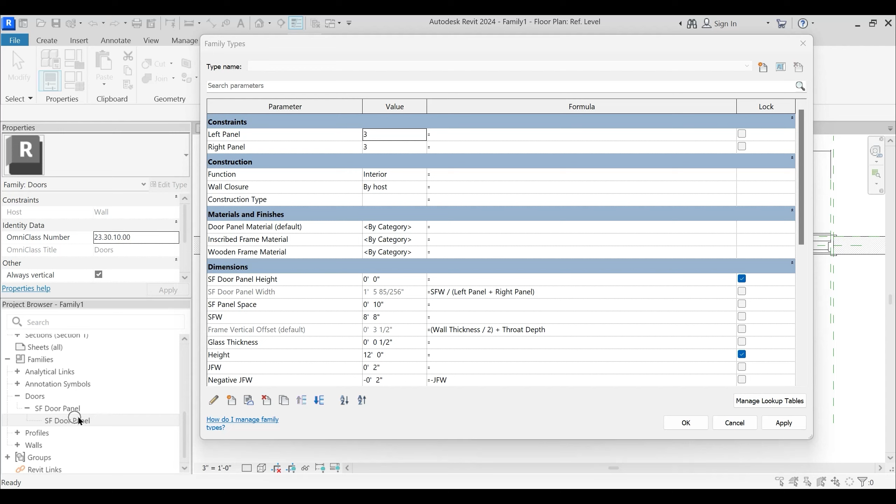Now what would be this sliding folding panel space? Actually it was correct, guys, but there was one thing which I forgot - once this particular sliding folding door panel which we designed as a generic model was embedded, we forgot to pass on the parameters of this. In order to compute this, I need to pass on the parameters of this particular thing. So what I'm going to do is click apply, and the sliding folding door panel, I'll just drag and drop.

So herein you see that it has instance parameters and type parameters which we need to pass on to this particular template file. So I'll select this particular door panel 3D door panel swing angle, new, shared - you see that I already designed that, 3D sliding folding door panel swing angle. Fine, and instance and constraint.

Next is that I need to say that this should equal the door panel material, and this is equal to inscribed frame material. Now, before transferring the width and height parameter from this, I should check whether the width and the height parameter has been computed in it.

The sliding folding door panel width is fine. That's the sliding folding overall width here - this is the overall width divided by the left panel and the right panel. So the overall width, sliding folding width divided by left panel plus right panel - that will be the sliding folding panel width for one individual panel.

Okay, what would be the panel space? That will be decided on the basis of this angle of rotation. But before that, what would be this sliding folding door panel height? That would be the overall height minus this transom frame width minus transom height - that will decide this particular height of this sliding folding panel.

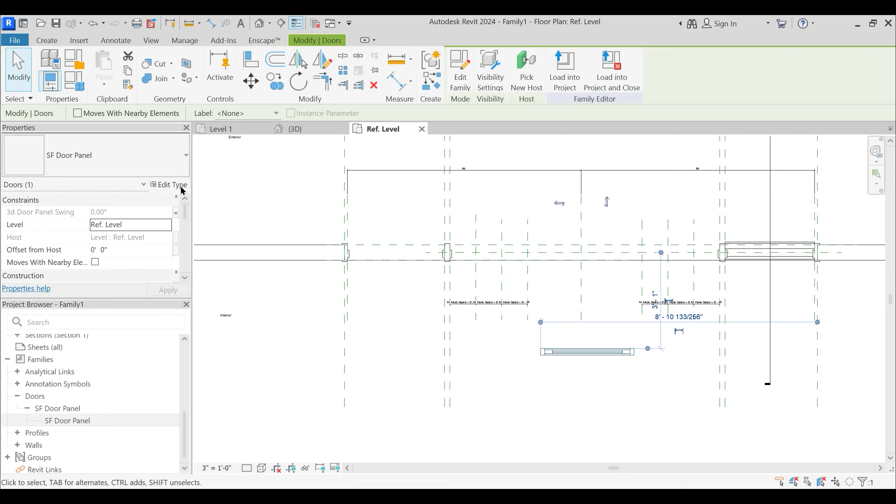So from here now, I will pass on this angle parameter. I need to pass on three parameters - thickness should equal thickness, width should equal sliding folding door panel width, and height should equal sliding folding door panel height, 10.3. Perfect, apply and okay.

So now this is perfect. Only thing is that now we need to go to reference level. Yeah, fine, this is perfect. So now what we need to do is design this space, this panel space - we need to compute this.

So what would be that panel space? That is again one computational formula - this panel space should be sliding folding door panel width times cosine of this 3D sliding folding door swing angle, plus thickness times sine of the same 3D sliding folding swing angle. Copy and paste and close parentheses. So that will design the panel space, which will be exactly equal to this door panel width, and apply.

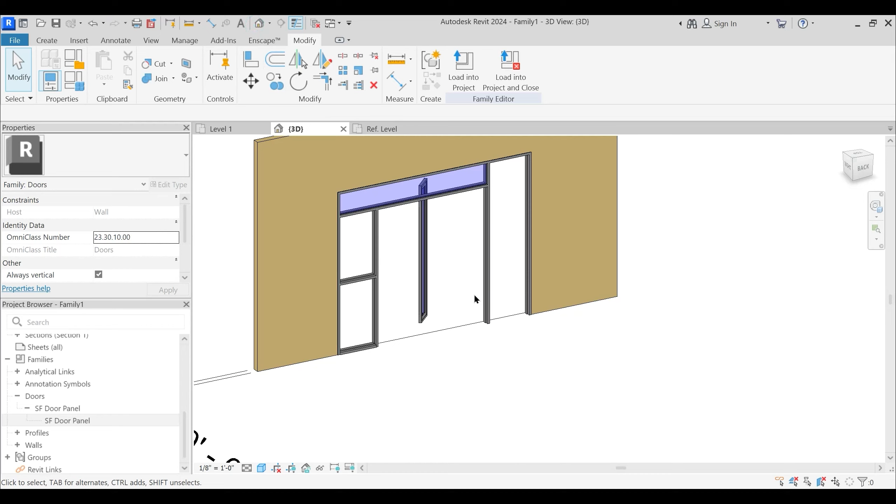So now we need to host it. But before that, I would just like to go to 3D, and you see that the width of this particular panel is too less. So what I'm going to do is, if you remember in its host file, we have given this also the parameter, the stile width, and that was the purpose of giving this, so we can compute it.

So you see that stile width I can change to 1 inch, or let's say 1.5 inch, and the frame bottom and top, from frame bottom height and top height, that also I can change to 1.5 and 1.5. Apply and OK. So that will change it here, and now you can load that into the project, family, and apply. So you see that changes.

Okay, now what we need to do is snap it here. So I'll just go to align this, and you see these reference planes associated to the 3D element, which we can snap, and this top to this. Okay, now what we need to do is...

Mirror, that is DM. I guess that I need to copy this first. Okay, and then DM, yes, and align, lock, and lock. Okay, again copy, same process, lock, and lock.

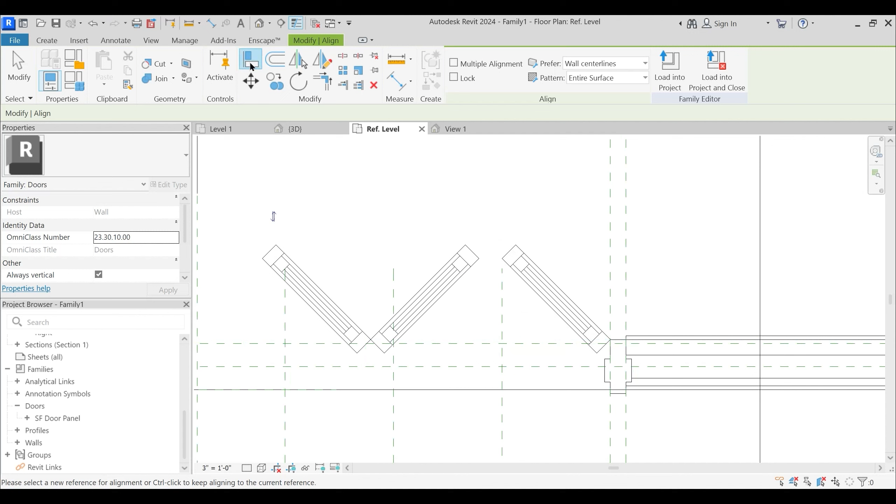Okay, now we need the exact mirror of this over here. So what we can do is select all of this, DM, and from center I will just check this, copy and paste it, but we need to snap it, we need to lock it, sorry. So just select this, lock, reference planes, and this, no, yeah, we need to lock it here. Okay, fine, 1 and 2, and likewise lock this here, and 1 and 2. Okay, now let's go to it in 3D.

Yeah, fine, see, perfect. Now if I just go to this particular 3D, and if I just change this to 0, you see that it will flush. And if I just completely open it, then it will completely open. And it will completely close, then it will completely close.

Fine. And if you want this width to exceed, then what you need to do is go to the type properties and change its width from 15 feet to 18 feet, and sliding folding width to, let's say, 12 feet. Okay, and apply. So with this, you see that the panels expand automatically.

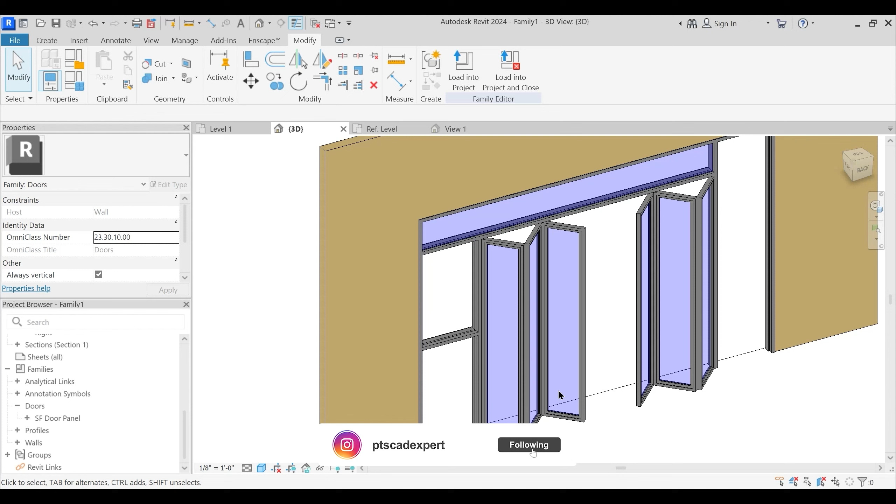And with this, if I just change this to 45, okay, you can also assign it a visibility parameter, wherein you can design a different type, where you can have only one panel on this left pane and 2 panels on right pane, or 2 panels on left pane and 3 panels on right pane.

But you see that this is taking a lot of time. So in order to learn all that, you need to be conceptually clear, and you need to enroll for this course. Then only I'll be able to teach you that in detail. But for now, let's proceed ahead with the modeling part of this and finish this. Okay, so I will just finish this.

Okay, and now we are going to use this particular family. This is family 1. This is sliding folding door panel. All of them are sliding folding door panel. Yeah, fine. So I'm just going to use this particular family and convert it into another door. So you just watch how I do that.

So edit, and herein I'm not going to do anything, but I'm just going to make a save as of this family, and I just call this, sorry, not louvers, left panel door. Okay, left panel door, fine. And after renaming it, I'll just load this into the project again, family again.

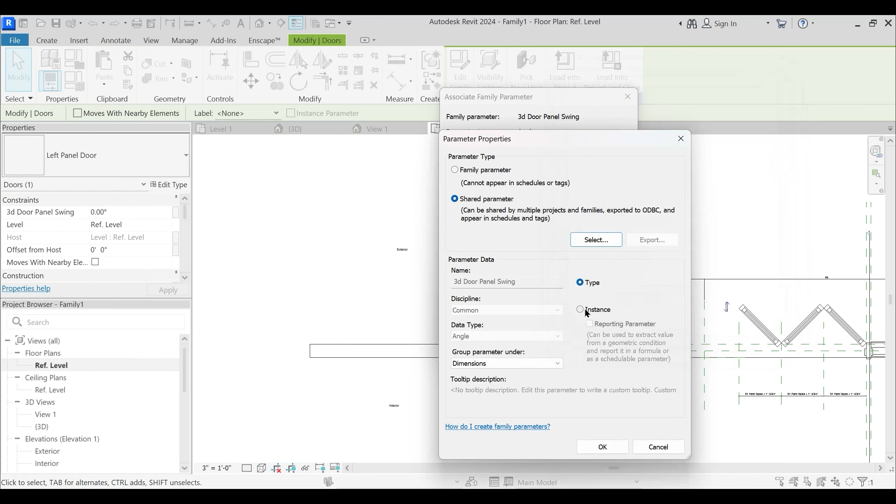And now this is the different family. What you need to do is I will just go to reference level and I will again associate these parameters, this 3D door panel swing angle that should equal. This time I'm going to use that same 3D door panel swing angle. Instance and constraints. Okay, door panel material into door panel material, and inscribed frame material is equal to inscribed frame material.

And type parameter, now very important. This time we are going to assign this thickness to the same thickness, but this width to a different parameter, that is left door, left panel. I guess that door...

Right panel, right pane window width, and left pane door width. I haven't designed that. Door width left. See, this is the right pane window width. It should have left pane. Okay, or maybe louvers panel. No, pivot door. Yeah, pivot door. It was pivot door width. Yeah, fine. Pivot door width, and just click OK. It already contains. So pivot door width. Yeah, fine.

But I need to first create that computation. So where is that pivot door width? It's already loaded, but what would be that pivot door width? That would be this overall width minus this window, left pane window. What is the parameter assigned to it? Right pane window width, overall width minus right pane window width minus sliding folding width. That would decide this width.

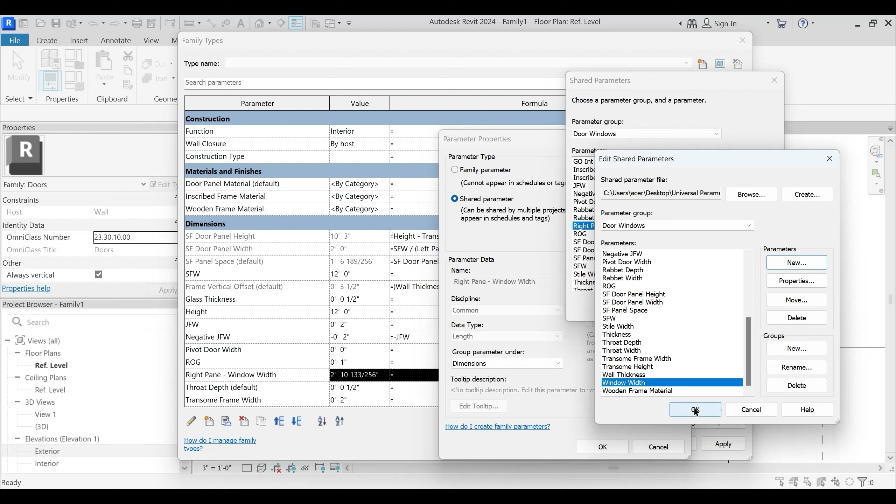Select, this one is creating a problem. So right panel window width, edit, right pane, delete it, new right pane, or let's just call it window width. Right pane window, or let's just call it window width. Window width, yes, fine.

And where is it? Window width. Yeah, so just drag it. Yes, pivot door width. What would be pivot door width? That is overall width minus just this window width. Yes, so that will decide the pivot door width.

Okay, apply, and pivot door height would equal overall height, I guess. Yeah, fine, apply and okay. So I would just create this and say that left pane door width should equal window width, and height should equal the overall height.

Apply and OK. And with that, now if I just change this to 45, apply and OK, align, lock, and align, select this and snap and lock.

Okay, let's go to 3D. For this, as I've shown here, you can also have a center pivot rotation and off-center pivot rotation, but all that is very much time consuming. I'm just here to explain you the concept of that.

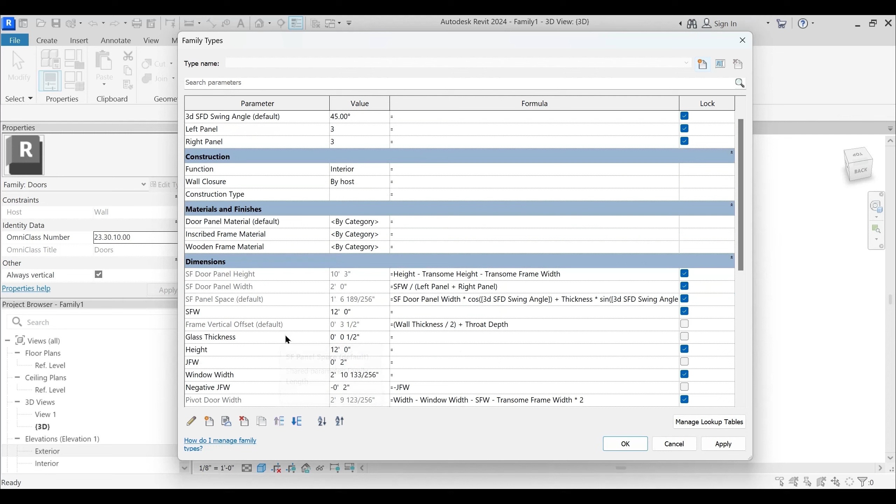Now this same family, we are going to convert it into the casement window and awning window, and that would be really very easy. So what I'm going to do is first create a couple of parameters wherein the width wouldn't be a problem, but there would be two parameters: height. So new, and this would be casement window height, and this would be awning window height. Okay, casement window and awning window.

Casement window height and shed and awning window height. Okay, casement window height would be overall height minus transom frame width times 2. Oh no, casement window height we will assign a parameter. Awning window height will be the computation.

So herein I'm just going to go from this reference plane to this, yes, I would say this equals casement window height. Okay, and for awning window height, we will create a computation that would be overall height minus transom frame width times 2 minus casement window height. You need to be very particular while typing, very case sensitive.

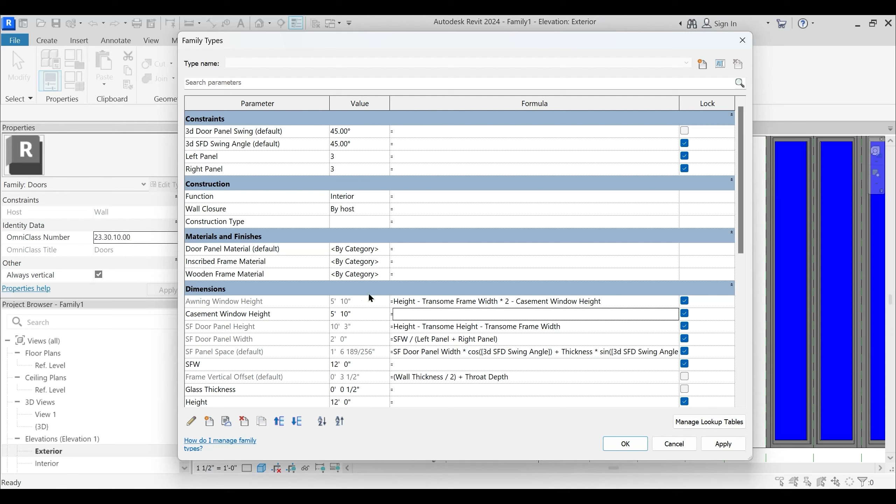Apply and OK. Fine. And now with this, I'm just going to select this particular thing and go to edit family. And first tell Revit that this is not a door, but this is a window. With that, all the parameters remain the same, but the only thing is when you load this into the project, it will read this as not a door but as a window.

So I will just load it, and you don't need to resave. I guess that, sorry, you need to make a save as of this family and call this casement window. Casement window. Yes, and then load it into the project.

Okay, and you can place it here, but just need to pass on. So again, this 3D door panel swing angle, so one more parameter, and couple of parameters, casement window swing angle.

And that should be equal to angle. Okay. C, one more, new, awning window, swing angle, and yes, all of that, both of them. And from that, I will just select this casement window swing angle instance and group it under constraints. Okay, fine.

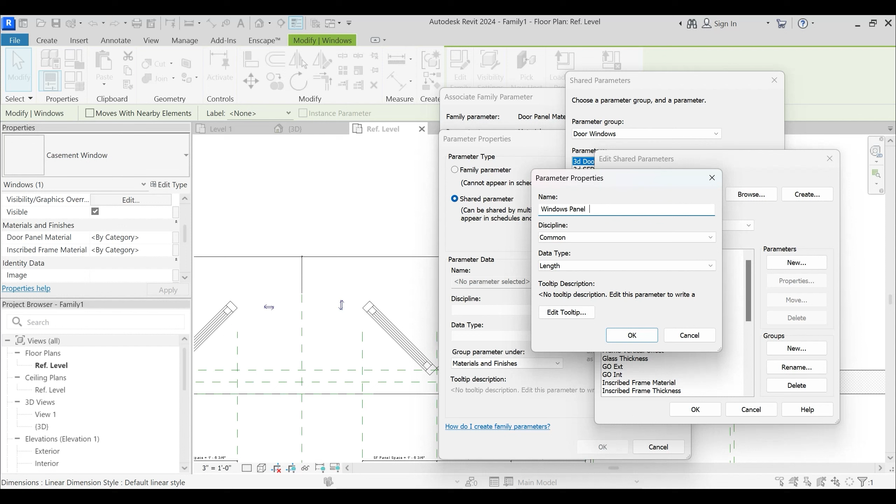And door, I forgot to - let me just go to this family types again, and this door panel material should - oh yeah, but we can just change it there itself. Yes, so this door panel material should equal shared, select, edit, new, windows panel material, and that should be equal to material category.

Okay, windows panel material and windows panel material. Okay, instance and group it. Yeah, since it is a material, group it under material section only, material and finishes. Okay, windows panel material should equal windows panel material, and inscribe frame material should equal inscribe frame material.

And for type properties, now thickness should equal thickness, width should equal casement window width - or not casement window width, just window width. Yes, and height should equal casement window height. Apply and OK. And let me just change this casement window swing angle to 45. Apply and OK. And you see that this pivot, rotation pivot is here.

So we just need to DM and uncheck copy. And then align 1 to 2, and this to this. Okay, and just need to give it an offset. And what would be that offset?

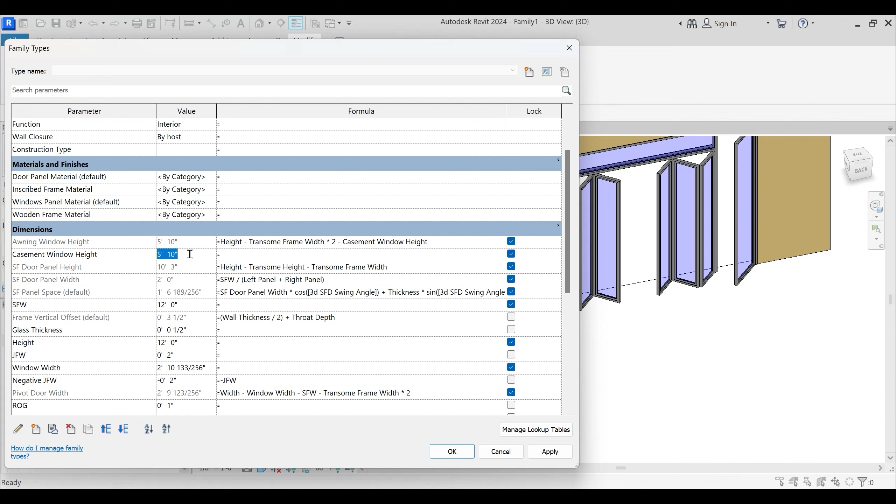That should be transom frame width. Yes, 2 inch. Okay, 3D. And yeah, see. So now if I just close this window, that will properly occupy the space. Fine, perfect. So this is that window. You can manipulate the height and width from here, wherein, if I want this 4 feet, apply and OK. Fine, so this will be smaller and the awning window will be bigger.

Now the challenge is to create the awning window. From this particular file, I will just select this particular thing and go to edit family. And this is the casement window. So I will just make a save as of this again, family and awning window. But what I'm going to do is use a slightly different method in order to model this particular window, wherein I am just going to delete all of this, because the window that we are going to design

is not in plan, but since it's an awning window - what is an awning window? Awning window is a window which has the rotation in height, I mean in plan - not in plan, but in section, rotation in section. So we have to design that in a different work plane. So I don't know why that's like that, but whatever you design here in right elevation will perfectly appear in the 3D environment in another file when you embed this particular file.

So in order to design this particular thing, I'll just go to - not left elevation - right elevation, and herein I will design that particular panel. Okay, so what I'm just going to do is this equals height - where is height? Yes, height 4 feet. Reference planes are over constrained. I didn't assign any of the parameter. Front elevation - oh yeah, front elevation already has that.

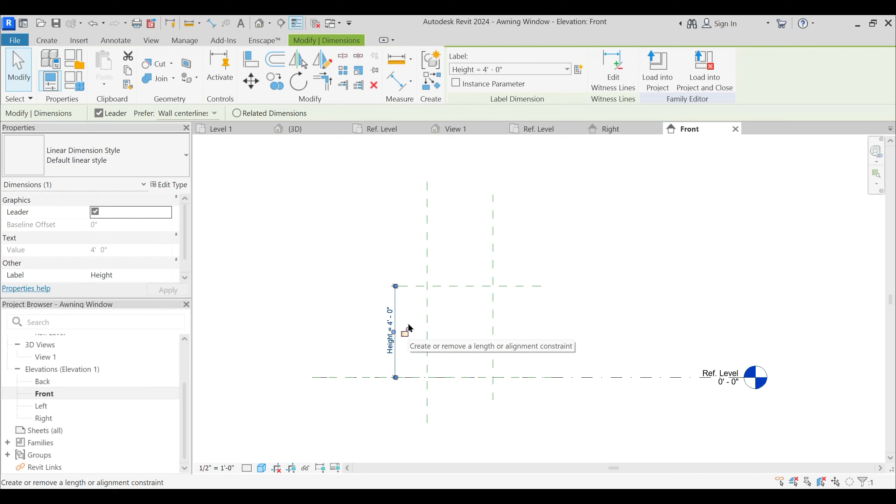So just delete it. Right, and this should equal height. Okay. Now, if you remember, for that particular casement window, we created that reference line which we logged to this two reference plane, but we did that in plan. But now since we want the rotation in section, what we will do is design that particular window here in right elevation where we will create the reference line not in plan but in elevation. Okay, left - right elevation. So I will just snap to the intersection of this two reference plane and just click align, and I'm just going to follow the same methodology.

Okay, and angular dimension, and this should equal shared parameter, then awning swing angle. Yeah, awning window swing angle. Fine, it is not an angle parameter. Delete, and awning window swing angle, and just change this to angle.

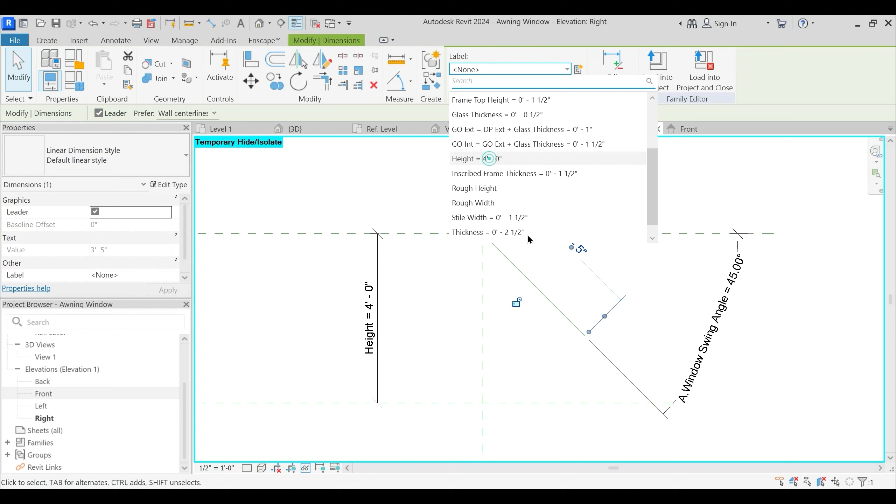One step you forget, and a lot of problems. Awning window swing angle, and instance and constraints. Okay, and this I'm just going to change this temporary dimension to permanent dimension, but this time I'm not going to make this equal to height - what I'm going to do is make it equal - this time I'm not going to make this equal width, but this time I'm going to make this equal to height since we are designing this in elevation.

Okay, now this rotation angle, if I just change to 90, then it will flush here. And what I'll do is create a reference plane, set plane and pick a plane, and this time I'm just going to select this plane and go to front elevation. Okay, and herein I'm just going to assign one parameter, and that would equal width. Okay, and I'm just going to follow the same steps now.

It will be very easy and I will be very fast. 1 2 3 4, and this to 0, and this to thickness, and this to inscribed frame material, rectangle, and minus 1.5.

This would be a quick revision of that particular door family that we designed, which we used multiple times for that sliding folding panel, for door panel, and for casement window also. And inscribed frame, yes, and with that, fine, I'll just finish.

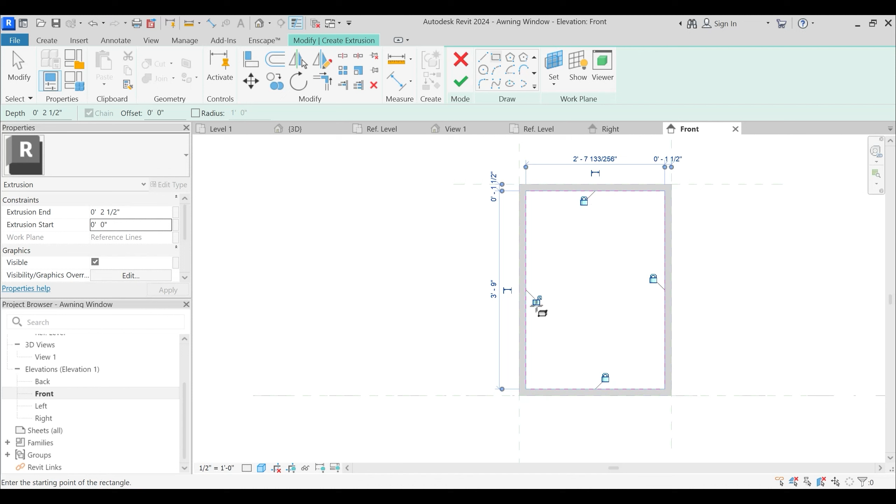Now I'll quickly create two more extrusions, wherein this would be 1 2 3 4, and since we have already created those parameters, door panel exterior, you can just... right now let me just set door panel exterior and door panel interior, and material is equal to door panel material.

Okay, fine, and with that, rectangle and minus 3 inch. Okay, and this is going to be frame top width, bottom height, frame top height, and this is going to be stile width.

Okay, and just finish. The only change you need to do is that you need to convert this door panel exterior, shared, edit, new, window panel exterior, and we would have done that for the casement window also, but I forgot. Anyways, window panel interior.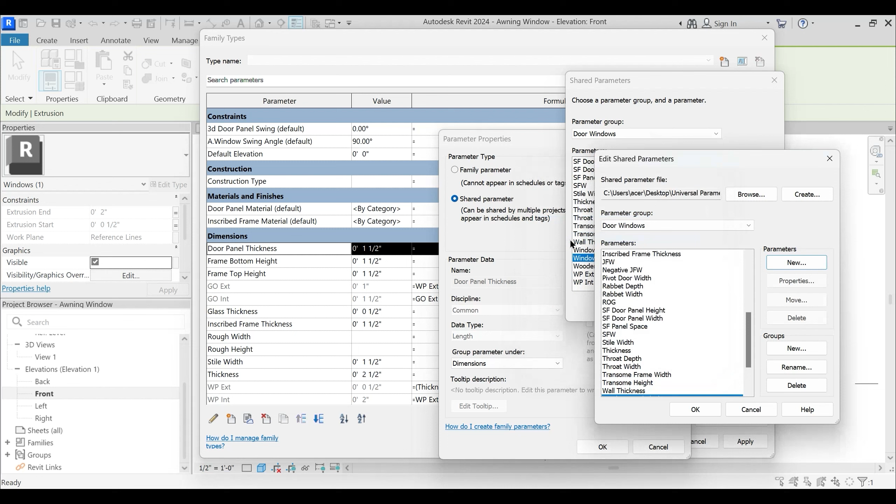Window panel thickness. This is an absolutely very important step, because when you try to schedule this particular thing, if these parameters are not changed, then you cannot have perfect documentation of that. And this door panel material should equal window panel material.

Okay, fine. So with this, this 3D door panel swing angle should equal, but awning swing angle is already defined, so just delete this. We don't need this particular parameter in this file. Apply and okay, and then create two more extrusions.

One lock it, and this would equal glass offset exterior, and this would equal glass offset interior, and this would equal pre-existing material of Revit glass.

Fine. With this, now if you just go to right elevation, you notice that this particular inscribed frame is having this window panel, which is having this glass, and all the computations are perfect. If you just change this to 45, then it will perfectly rotate. If you also change this height to 5 feet, see this panel also expand, and this also, everything is parametric. Okay.

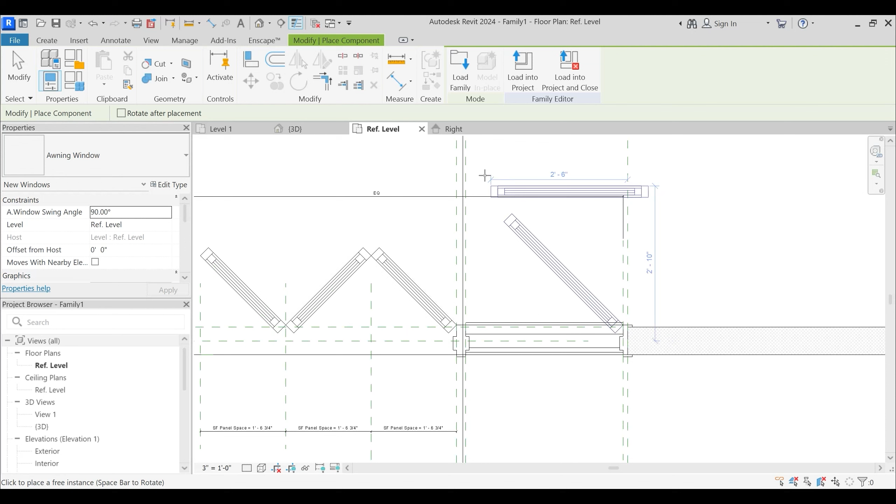Before proceeding, I would just like to go to this particular casement window, and the things which we forgot, for example, this door panel material should equal window panel material. Perfection is very important. Just remove, we should have just edited that. Yeah, edit, and that should change to Windows panel material.

Door panel exterior should equal window panel exterior, and door panel interior should equal window panel interior. And okay, is there anything left? Door panel thickness should equal window panel thickness. This is the purpose of creating the text file, shared parameters.

Okay, and with this I'll just load this back into the project and just overwrite existing version. And this window has two windows, casement window and awning window. Fine. Awning window I will just close it, and casement window also I will close it. Both of them are loaded in this.

Fine. Now very important is that how will you align this? For that again you need a section, and I would like to take this section here. Okay, and first I will just take this section, and this is that particular awning window. We cannot properly visualize it because of the view range, so I will just expand this view range till here. And now, yes, we can completely visualize it.

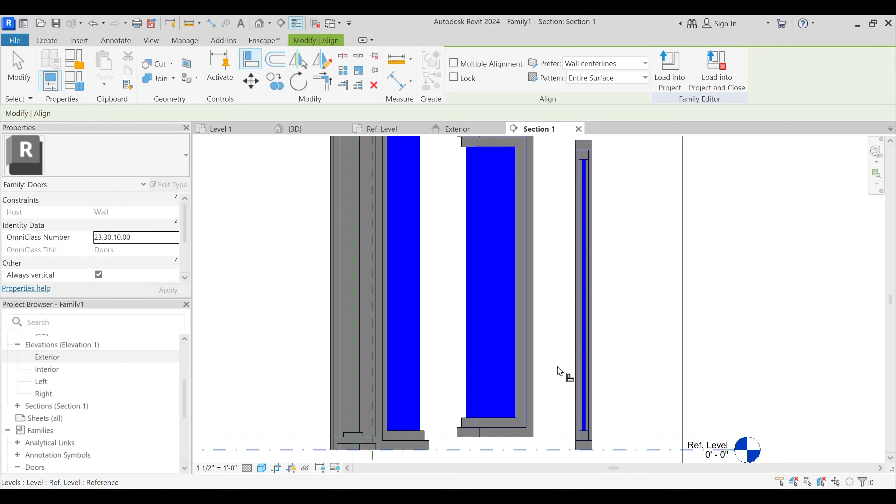I will just align this and align this to this. Oh, align this to this. Yes, and lock. Okay.

Now, very important, first pass on the parameters that this awning swing angle should equal—we have already there in shared file instance—and group it under constraints. Okay, fine. And material inscribed frame material is equal to inscribed frame material, and window panel material is equal to window panel material. Fine. And edit type, and most important is that thickness should go to thickness, width should go to door width, I mean window width, window width, yes, and height should equal awning window height, which we have already computed and designed that parameter.

And okay, so you see that this awning window height, something is missing.

Overall height minus transom frame width, minus one parameter, transom height. Yes, and that marked it perfectly. But what is very important is where will you snap it? For that I would just go to exterior, and let me just isolate until we can see only this particular thing. Okay, and now align.

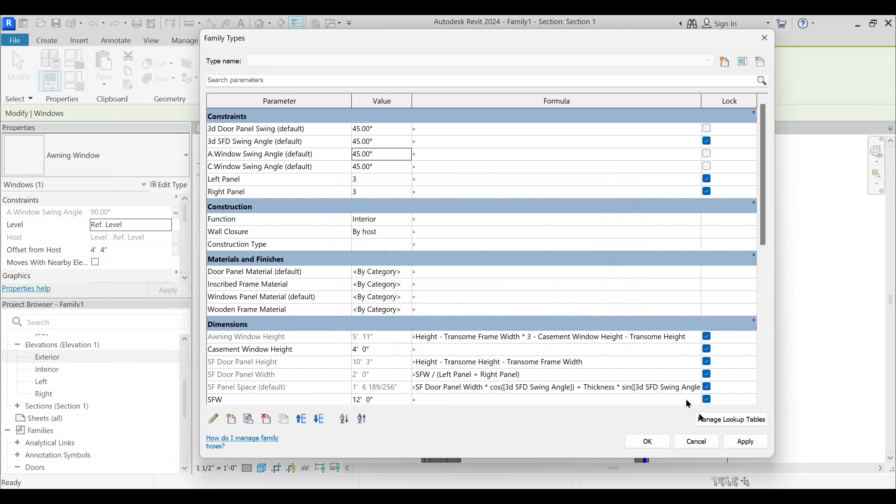Remove constraints, and because we snapped it to this reference plane and locked it, that's why it happened. Actually we were supposed to lock it here, align, and lock it, and this exterior and lock it. Okay, go to exterior again, and here in HL, align this and snap this to this and lock it. Okay, fine. Now we don't have any issues, and you see that our family is complete.

Let's test this out. Testing is very important before loading it into the project environment. What I will do is change this casement window height to something like 5 feet. Okay, and apply. So you see that everything expands parametrically. Let me just change this 3D swing sliding folding - that's fine, but this to 90, apply.

Yeah, fine. Okay, now we need to design a sunshade, which is the visibility parameter. For that I need to go to exterior again.

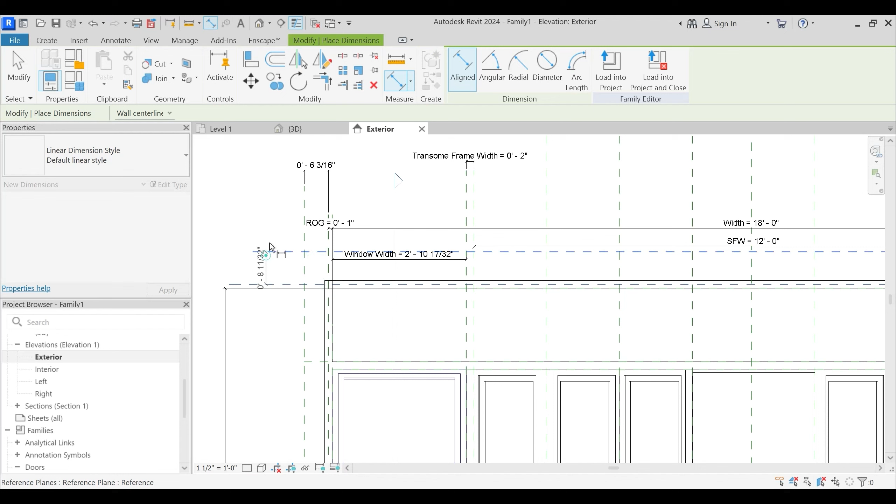I would just draw a reference plane, HL, 1 and 2, and RP and 3 reference planes. Okay, what would be this? This would be 1 and 2, and this would be.

This would be shared parameter, or let me just create a family parameter, sunshade depth, and this would be sunshade extension. I would just change the sunshade extension - where is it? Yes, sunshade extension to 15 inches, or let's say 18 inches, and sunshade depth is equal to 8 inch, apply and OK. Oh, sunshade depth is equal to 6 inches, I guess. Let's find 8 inches. Okay, fine.

Now we are again going to create a profile. We are going to snap a profile onto this. So I'll go to file, new, and go to that wooden profile. Profiles and wooden profiles, and edit. I'm just going to delete all of this and RP, file and save as family sunshade profile.

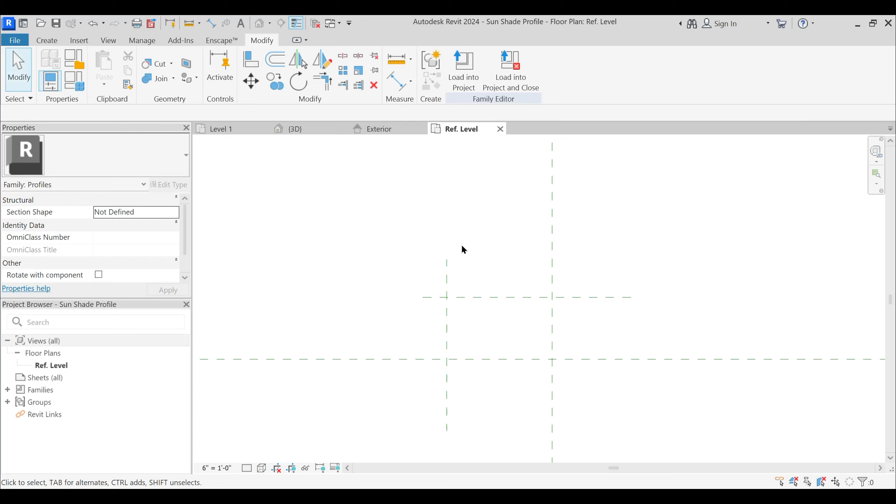Okay, this is going to be sunshade depth. See, if you have created that shared parameter, then we would have used that shared parameters file, but we created the family parameter, so we have to type it, and this should be sunshade width. Okay, and this would be 15 inches. Oh no, 15 inches would be too much. 12 inches, and this depth is 8 inches.

Okay, and herein I would just create lines, lock. These are just the 2D lines, lock, and 6 inch and lock. Okay, and LI connect. 6 inch should be too much, I guess. Okay, that's fine. Create lines. Yes, and TR. And this is locked to this, and this is locked to this. Okay.

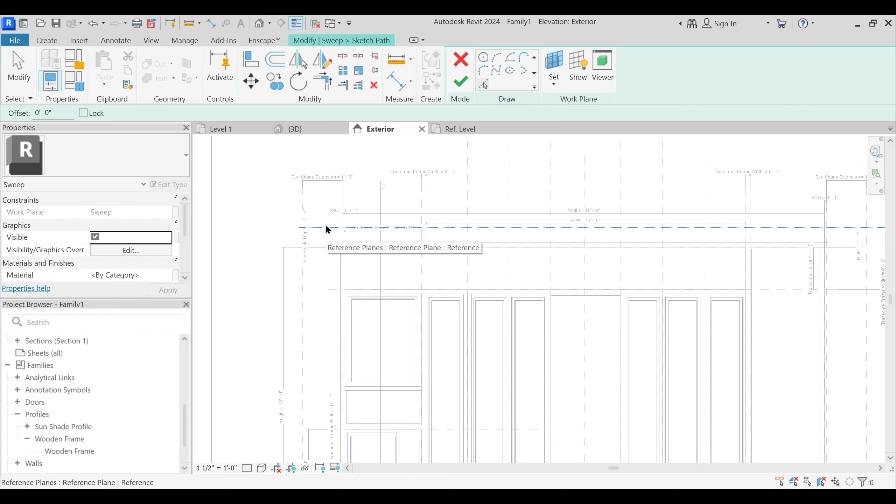Okay, fine. I'll just load the sunshade profile into family one. And herein I will create one sweep, and sketch path, pick lines, lock, and lock, and just finish.

Oh, but we forgot to select the work plane. So we need to go to the reference level, and the work plane, very important, should be the face of the wall. So pick the work plane, and this should be the work plane, and then go to exterior, and now sweep, sketch path, pick lines, lock, and align, and lock, and lock, and finish. And now we have that sunshade profile, which you can just reference.

Only thing is that we need to go to section to properly position it. ZA. Yes, so it is not properly snapped. Maybe its work plane is edit, pick a plane. Yes. So we need to play around with these parameters.

So 90. Yes. And profile is flipped. And DM with copy and check. This is a bit confusing. Finish. And 180, 270. Oh, yes, perfect. And then the vertical offset, you can also - 18. No, this is not the vertical, so horizontal. 18. Negative.

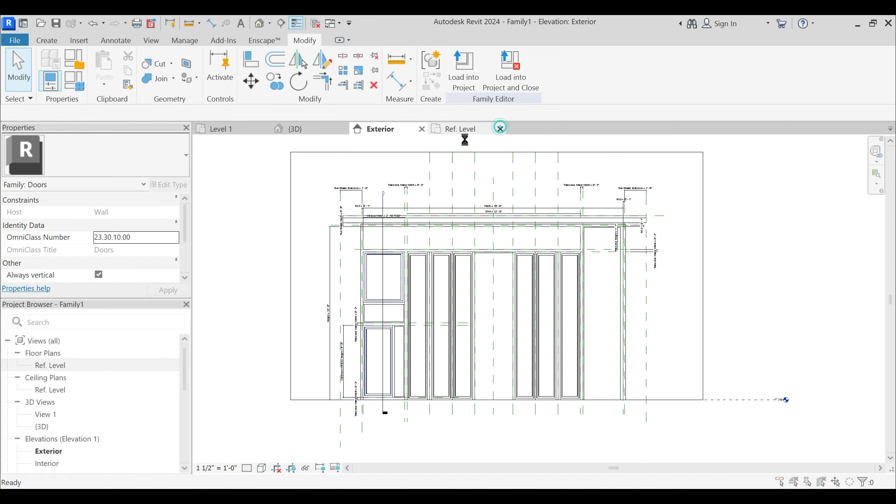With all these changes, now is the time to load this particular parametric door into the project environment. So family 1, I'll just load it and snap it, and I'll go to 3D view. Here under doors, since we edited that door template, you will have that file under doors and family 1, and you can just rename it sliding folding doors.

Copy and rename it and paste. Okay, with this, if you select this, you see all the editable parameters which you can edit instantly, define a different type, and do everything. For example, if I change this particular 3D sliding folding swing angle to 0, the door will shut, and this to 0 as well, and casement and awning window to 0 as well, and you can see the configuration.

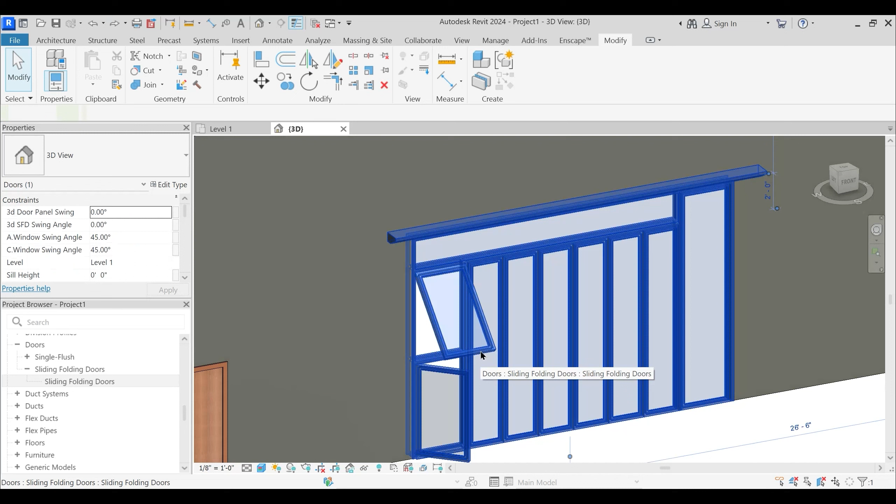The only thing is that when you design an awning window, you cannot exactly give it a 0 degree angle. You can give it 2 degrees, and that will perfectly expand, but you cannot give it 0. So this should be 90 and this should be 0, and everything shuts. And you can give this different materials.

Right now, I will just give it the same material to all of that. Control V and Control V. Yes. And there might be a problem for passing on the parameters - this inscribed frame material has not been converted to instance, and that's why it's not appearing. But yeah, fine, the only thing is I have forgotten.

Let me just rectify that error. Edit, and all of these parameters should be instance. Yeah, okay, this and wooden frame also instance. Okay, apply and okay. Yes, apply and okay, and then load it back into the project.

Wherein we can instantly edit the material parameters also. Fine, now what you can do is here I guess the sunshade material should be concrete, RCC, concrete, cast in place gray. Fine.

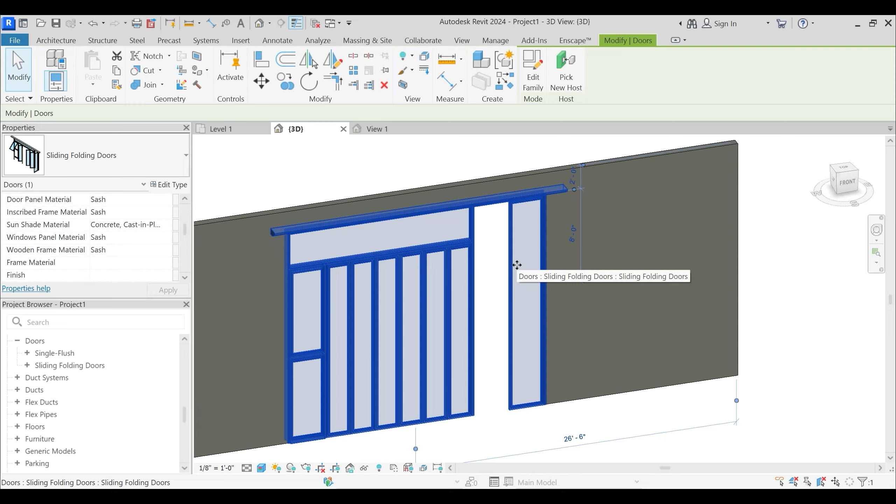The only thing is there might be some problem. I might have forgot to assign this width. No, width is perfectly assigned, window width. But that window width has to be a computation. Window width - yes, see, so that should be overall width

minus transom frame width times 2, minus sliding folding width. Window width, sliding folding door width, width minus transom frame width times 2. Yeah, fine.

So where am I changing? No, not the window width. Oh, cancel, this is the door width. Oh, that didn't expand, so where is the pivot door width? Width minus window width minus sliding folding width. Yeah, this is perfect. So why is that creating a problem in the project environment? Why didn't it expand?

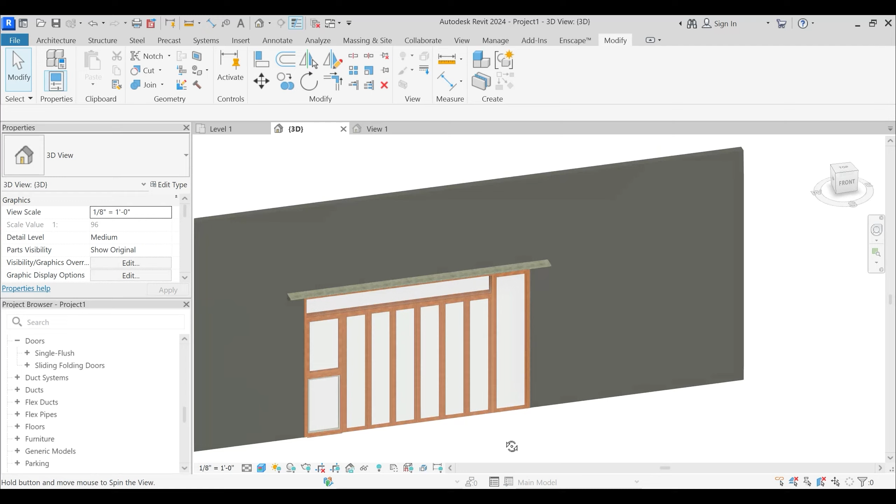Fine, now if you just change these particular parameters again, wherein the width should be 25 feet and transom height should be 3 feet, and window width to be, let's say, 4 feet - automatically everything will update - 2 feet, let's say 3 foot. Okay, and height to be 15 feet, and this to be 6 foot. Okay, and just apply and fingers crossed.

Yes, perfect, we don't have any errors. Okay, fine. And with this, if you want the sliding folding width to be 15 feet, or let's say 14 feet, then panels will automatically expand and adjust accordingly. Okay, and now we can open up this door.

So you see how time consuming and difficult it was. So if you want to conceptually get clear regarding all these concepts, then enroll for this particular course and let's grow together.